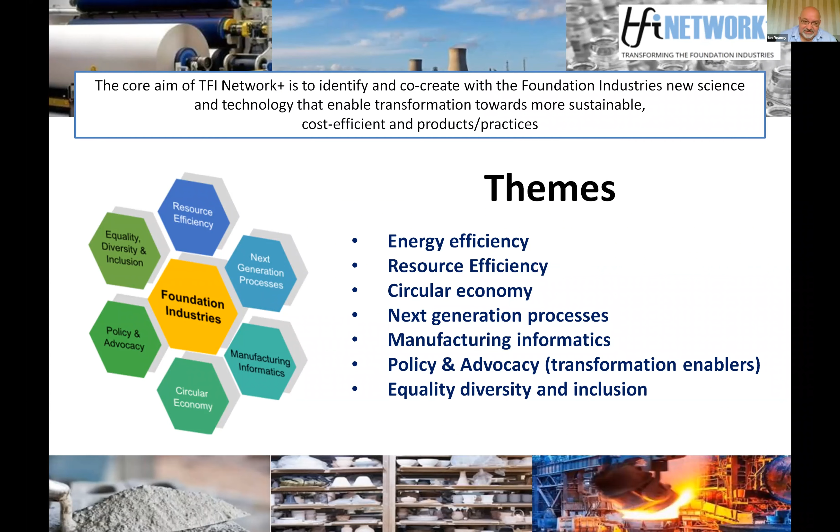And as we move forward, we have more events coming up. Our next project call is going to be resource recovery and industrial symbiosis, and there will be a workshop linked to that. We'll keep you all up to date through our outlets. Debbie will look after the advertising of events to make sure that you know all about what's coming up. And I hope you can attend future events as well as this one.

We have, in addition, our Blue Skies Green Future webinar series, which showcases groundbreaking technologies for the foundation industries. We've had 3 of those already. We'll restart that series in September through to the end of the year, where we have 4 headline speakers telling you all about exciting new potential things, which are not necessarily commercialized around the corner, but could be the future in the foundation industries. Sorry, can you go forward another one?

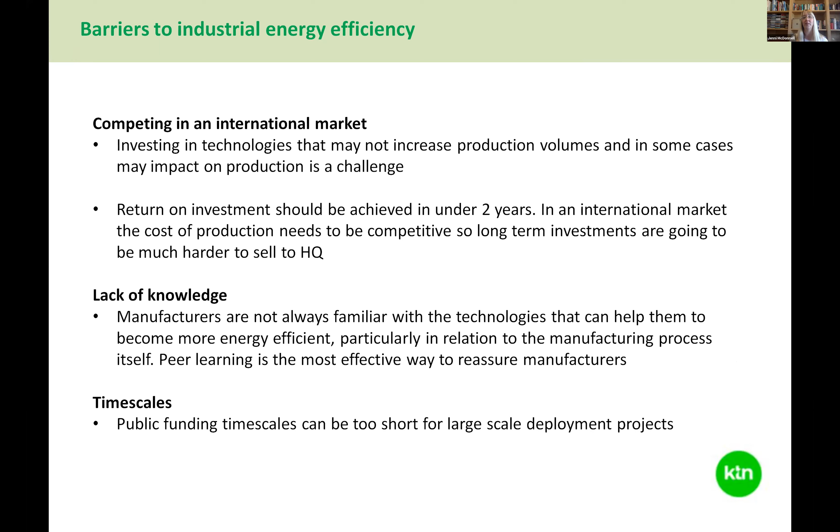Now, as I say, I do think from that gloom and doom, there is a light at the end of the tunnel. Over the last 18 months to 2 years particularly, I've heard a lot more manufacturers discussing their new net zero strategy and having a goal to get to net zero by 2035, 2040. And that is very encouraging. It does mean that they're now actively looking for solutions to help them become more energy efficient. And from the work that I've done with the government, I think these are probably the top 5 energy efficiency improvements that I have seen happening at manufacturing sites in the UK.

The first one, without a doubt, the most popular solution is heat recovery. Heat recovery on its own, or heat recovery with organic Rankine cycle or other ways of converting that heat into power that can be then reused in the manufacturing process. That is happening everywhere. The second one I would say is improved process controls and automation.

A lot of manufacturers will have a little bit of process control. Maybe the furnace has process controls, but not all the way along the manufacturing line. And that is something that they're now starting to look at. How can we join the whole manufacturing process together as a system and build in AI and automation to make the process more energy efficient?

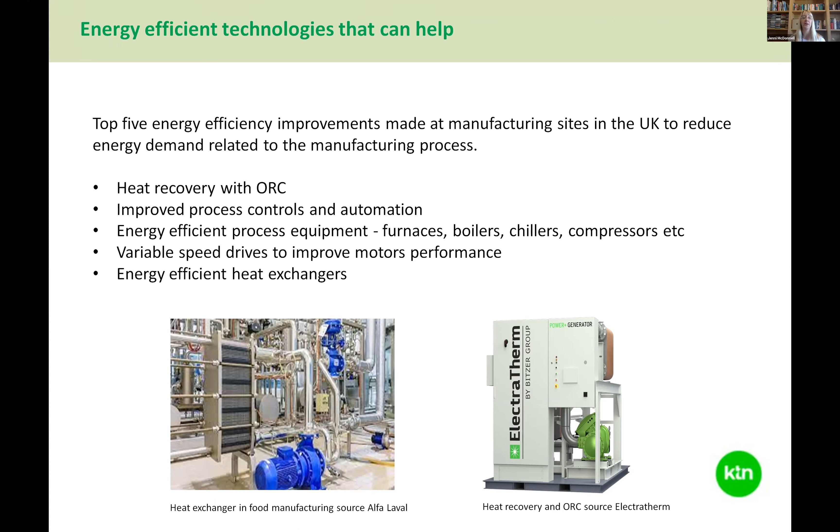So now to talk about one of the funding opportunities. Obviously, this is a TFI network, and I'm sure we will talk about the TFI competitions, which is R&D support for industrial energy efficiency. The Industrial Energy Transformation Fund is also supporting businesses with high energy use to cut their energy demand and reduce their carbon emissions. But this fund isn't R&D, it's capital investment for energy efficiency and decarbonisation. So it's allowing manufacturing sites in England, Wales and Northern Ireland to apply for the funding and install something that's going to make a difference straight away and allow them to achieve energy savings straight away.

The whole fund is 289 million. We had the first round of funding last year with 30 million spent, and we're currently in the spring window that's open right now, worth 40 million. Phase 2 will start in the autumn, and that's the remaining 219 million, and that will last up to 2024.

So there are 2 competitions open at the moment. As I say, in the spring window, you can either bid to do a feasibility or engineering study, preparing for future deployment projects, and that can either be in energy efficiency or decarbonisation, or you can bid into the deployment competition, which is deploying mature energy efficiency technologies. So that's technologies that are around TRL 8 to 9. Both those competitions are open at the moment. It does close on the 14th of July, so we've only got about 3 weeks left for this round of funding, but as I say, it'll be back in the autumn. Next slide.

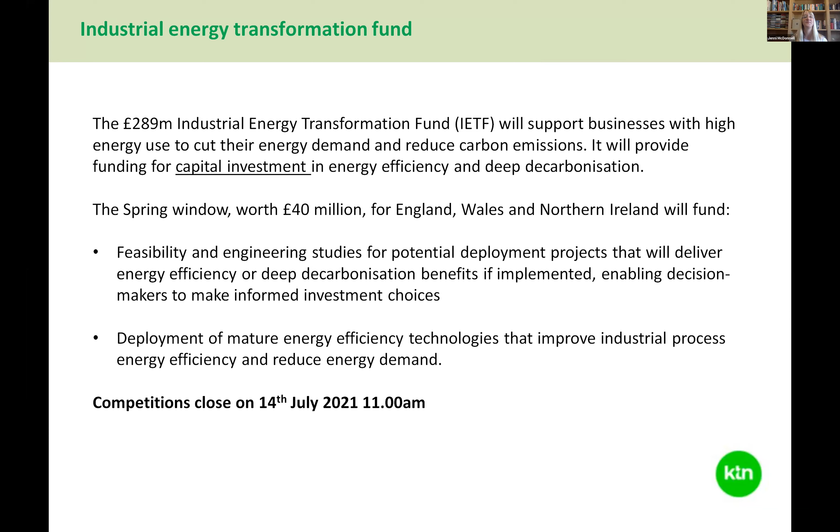So just to look at the 2 competitions in a little bit more detail, as I said, the feasibility and engineering studies is building that pipeline of future deployment projects around energy efficiency or decarbonisation. What it won't do, unfortunately, is fund sites to do energy modelling and understand their energy demand across their site, or do any kind of market analysis and review lots of different technologies before they choose what it is they want to deploy. You have to have done that piece of work already when you come to the IETF, and the feasibility study is then allowing you to check the technical and economic viability of deploying a particular technology on your site.

So these projects can be collaborative or single applicant, and it has to be led by the business that operates the manufacturing site. So if it's single applicant, it's the manufacturer, but they can have subcontractors and work with technology providers in that way.

The sites, so the studies have to be based on a site in England, Wales and Northern Ireland. If you have sites in Scotland, there is a Scottish government version of the IETF. The scope's almost identical, and their next round of funding opens in the autumn as well.

And the lead applicant for this one has to be the end beneficiary of whatever you're doing. So for instance, if you're doing a study to look at heat recovery, that energy saved has to be reused on the manufacturing process. It can't be given away to a local community or nearby business. But the good news is the manufacturer can partner with other businesses, research and technology organisations, academics and public sector organisations. As long as they have an active role in the project, then they can be a partner.

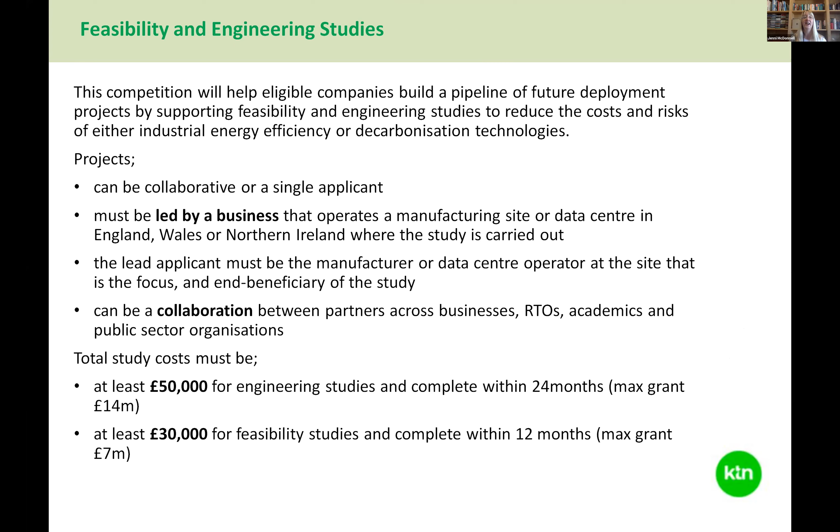Your total study costs, that's your grant plus match funding, have to be at least £50,000 for engineering studies and at least £30,000 for feasibility. Next slide.

And then the deployment competition, as I say, if you're ready to do something straight away, this is the one for you. You can deploy mature energy efficiency technologies that improve the efficiency of the manufacturing process itself. And this can be, again, collaborative or single applicant, must be led by the business that owns the manufacturing site where the technology is going to be deployed, and has to be the end beneficiary.

And as this isn't an R&D project, at the end of the project, the technology has to be fully installed and operating or ready to switch on. So you get those energy savings straight away as soon as the project is over. For this competition, the grant alone must be at least £100,000, and then your match funding goes on top of that. Next slide.

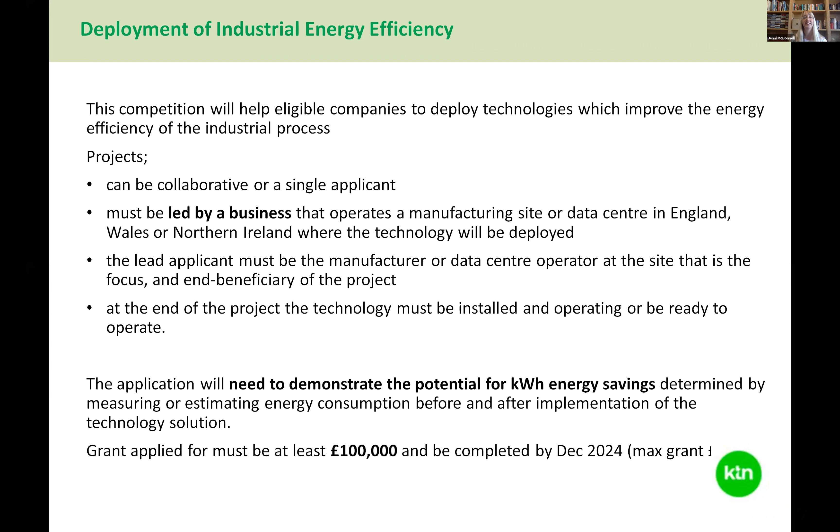So I just wanted to share 3 case studies. These were projects that were funded in the first round of the competition last summer. First of all, we have Hinton Perry and Davenhill. They're a ceramics company. They make the Dreadnought tiles and bricks. And they are currently looking at whether they can improve the energy efficiency of their brick and tile dryers by capturing the waste heat from their kiln flue gas, using hot oil to transfer that heat to the dryer, and then recirculating that heat to actually dry the tiles and bricks, instead of using gas and electricity,

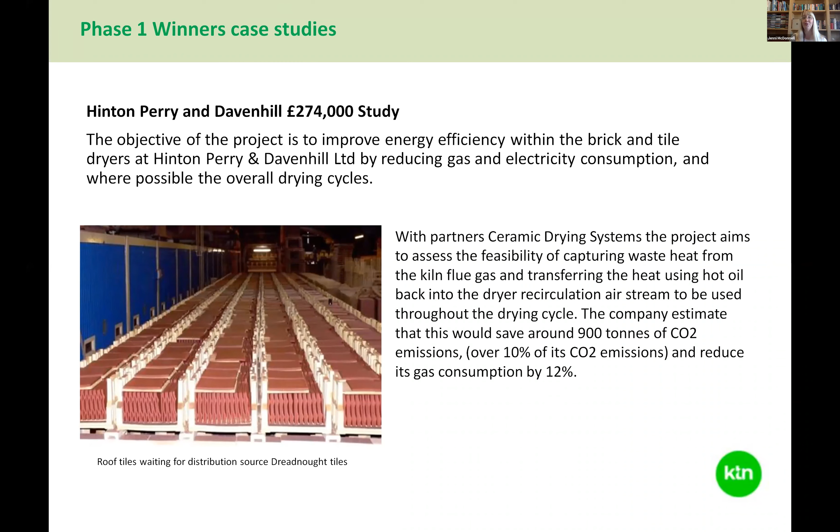which is how they do it now. The company has almost finished the study, and they reckon they're going to save about 900 tonnes of CO2 emissions, so about 10% of their current CO2 emissions by doing this. So that's going really well. I think they will continue to deployment. Next slide. The next one is Tate and Lyle Sugars.

They have a sugar refinery based in London. They're also doing a study and working with engineering consultants, Fichtner, and also a technology provider called PMW Technology, and they have developed a cryogenic carbon capture process called A3C. And so this study is looking at the feasibility of deploying this carbon capture technology at the refinery to capture the CO2 from the flue gas as a frost, and then using that recovered carbon dioxide as a revenue stream for Tate and Lyle. Next slide.

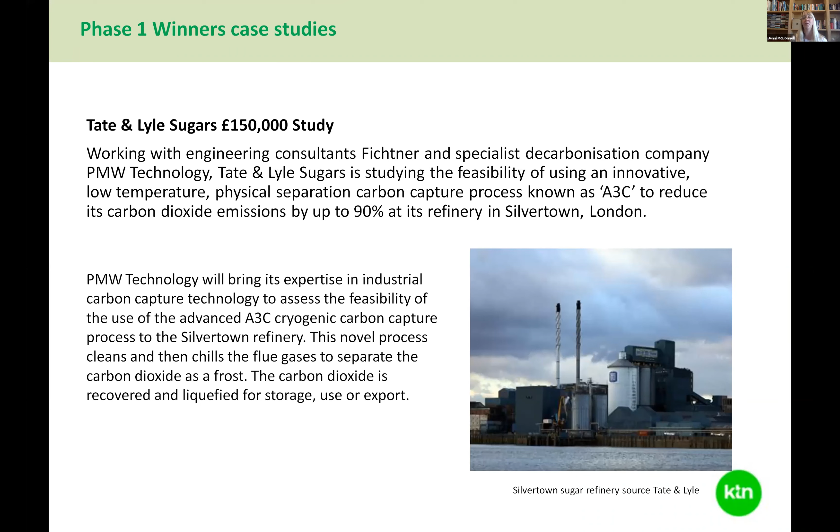And finally, one of the deployment projects, Essar Oil is a refinery up in the northwest, and they are deploying a brand new furnace for their process. They currently have an oil-fired furnace, and they are deploying a hydrogen-ready furnace. So it won't be burning hydrogen straight away, but the furnace that's going in will be capable of having 100% hydrogen to run it. It's also looking at other energy efficiency improvements such as heat recovery, and they hope to be the first oil refinery in the UK to run on 100% hydrogen.

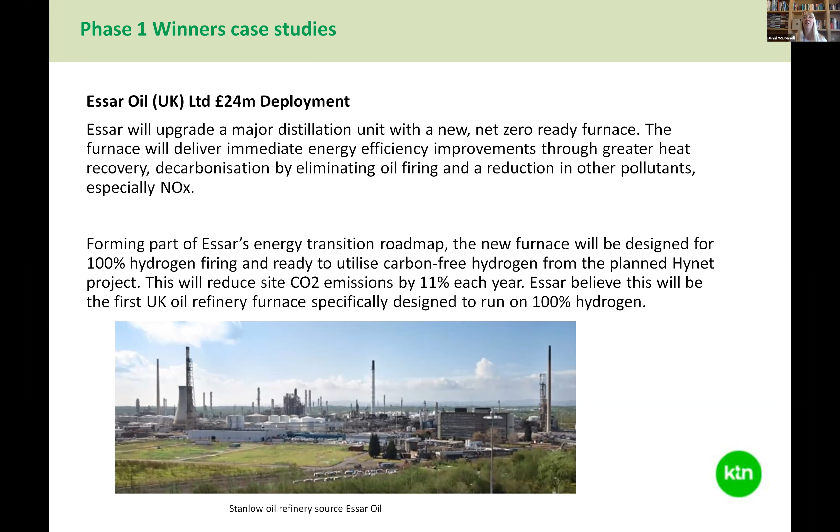And I think that's it. Yeah. So some great examples of what you can do around industrial energy efficiency. Thank you very much, Jenny. That was a fantastic overview of the funding landscape. And we can open up your talk to further questions.

I certainly have one, Jenny. Your funding is quite broad. Yes. And not specific to the foundation industries. No. Have you any idea of the percentage in your first call that went to the foundation industries? Not off the top of my head. It was a real mixture, though. Okay. You know, there wasn't one sector that dominated, and we had a good mix, and a good mix of sites across England, Wales, and Northern Ireland as well. So we were pleased with that.

Could you expand a little bit on the, you had some feasibility aspects to it and involvement of academics, perhaps. Could you expand on that a little bit to explain how that relationship might work in the context of some of these grants?

Well, probably more for the decarbonisation theme. For decarbonisation, because we know some of those technologies aren't near to market yet, the TRL level for that is TRL 7. The IETF won't fund demonstration or testing of a solution, but it will allow, I guess, academics to work with manufacturers to just explore whether something would work on their site, and then look elsewhere for funding to be able to demonstrate it. So I would think that's probably the best way to get involved.

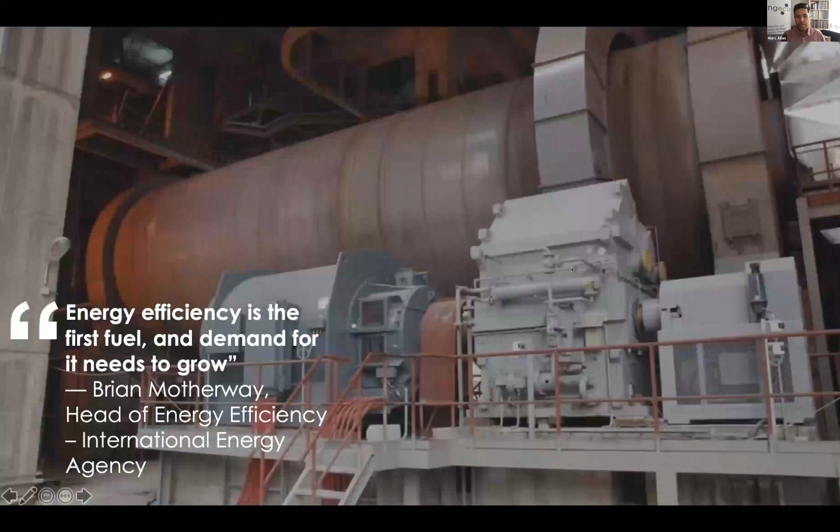So starting off with a quote from the International Energy Agency, and people have probably heard something very similar to this before, but it's that energy efficiency is the first fuel. So it's the first place that we should go to with regard to optimizing our energy consumption across the plant, and provides a great way to actually reduce emissions and reduce costs. So I'm going to look at 3 areas today in this fairly short presentation. We'll start off with some information around the context. Why do we even care about energy efficiency in crushing and grinding, or even energy efficiency as a whole? So this is taking a pretty broad view on decarbonisation and how that will play out. We'll look at the size of the prize.

So I just finished a piece of work on quantifying how much energy crushing and grinding uses globally for the mining industry. And there's a bit of an extension to that to quarrying and cement and other things like that. But highlighting how much energy in total does it take to turn big rocks into little rocks. And then looking at some of the opportunities, some of the things that we can do to try and reduce that energy use in these unit operations.

So looking first at the context. So it should be no surprise to anyone that decarbonisation efforts need to proceed, and they potentially need to proceed a lot faster than they are currently. There has been a lot of talk and announcements around net zero emissions targets being set by companies, being set by countries, all in support of these decarbonisation goals, and moving towards this state where we're at first net zero emissions and then ultimately negative emissions, so removing CO2 from the atmosphere.

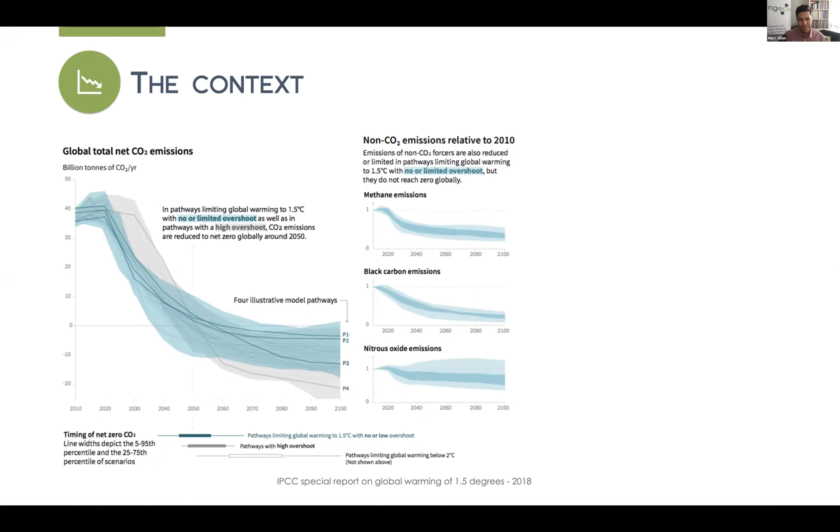If we're going to go for a bit of overshoot, we've got some time, but still not much. We're still decreasing at a pretty great rate of knots from 2030 in those. But the later we delay, the more time we take to peak and start coming down, the more we have to rely on removing emissions from the atmosphere, on negative emissions. So peaking is vital, and we need to do that straight away. Energy efficiency has a pretty big role to play in that. We are looking at needing a 7.5% reduction year on year in emissions.

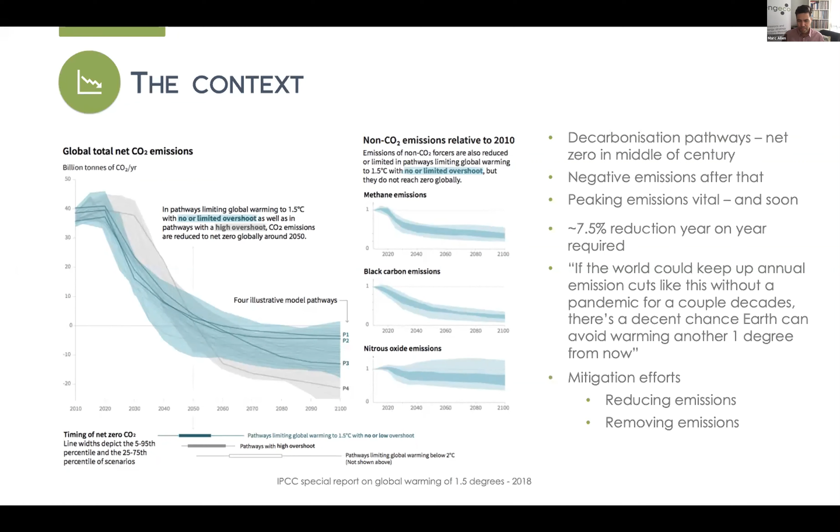Last year, 2020, was an unusual year, I think everyone will agree. Looking at 2020, which was untold economic and human damage, and a huge change in the way that we live and work and travel, etc., that only achieved about 7 to 8% reduction from the previous year. So we need a way to do that each year and keep that going way off into the future, and then ultimately start removing emissions. So mitigation efforts need to concentrate around how do we reduce emissions, then how do we remove emissions, and this is where energy efficiency has a pretty big role.

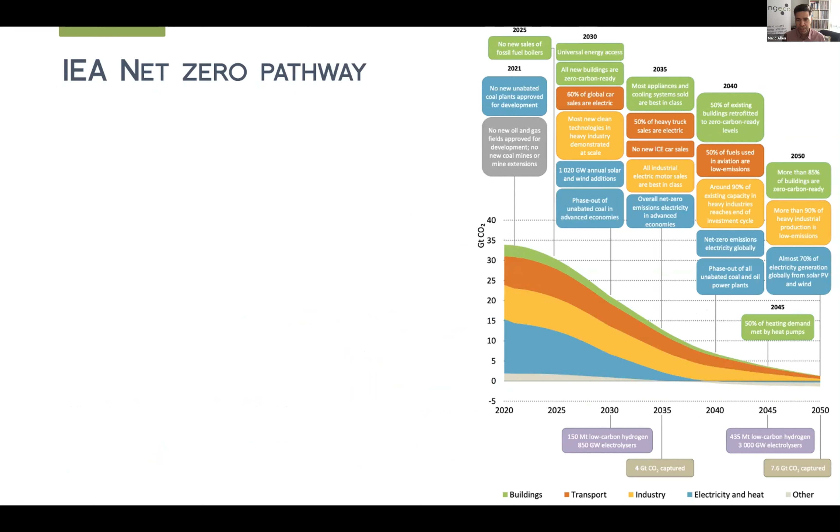The IEA also recently released their net zero pathway to achieve net zero emissions by 2050. A few headline numbers came out of that, particularly stuff around no new oil and gas developments, but industry features quite a lot in here as well in this scenario. So it's a pathway, it's a scenario, it's not a forecast, it's certainly not a view of things to come, it's a view of what's required. Industry itself has a pretty big role to play in these yellow boxes.

So looking at new technologies installed in heavy industry, and they'll, in the IEA scenario, be available at scale in 2030. Everything to be high efficiency motors, best in class motors, 2035. And then basically 2040, everything's at the end of its investment cycle. So any new stuff is going to be very new, very efficient equipment. So then hopefully by 2050, we've pretty much got rid of all of the emissions from heavy industry as well. This scenario tries to minimize the use of offsets, concentrates a lot on energy efficiency.

So it's really about, as well, to achieve zero emissions industry, how do we generate zero carbon energy? How do we then store that energy? Can we have high efficiency transmission or some sort of energy carrier like hydrogen or something similar to get that renewable energy to the place it's needed? But at the same time, we're also maximizing the efficiency of end users, so we don't have to generate so much energy in the first place.

So we are talking about a pretty big transformation to the energy system and to the end users to enable this net zero emissions industry. And to be fair, the more we can do without having to rely on offsets and carbon credits, which are useful in their own right, but certainly may not have the capacity to absorb all of our emissions.

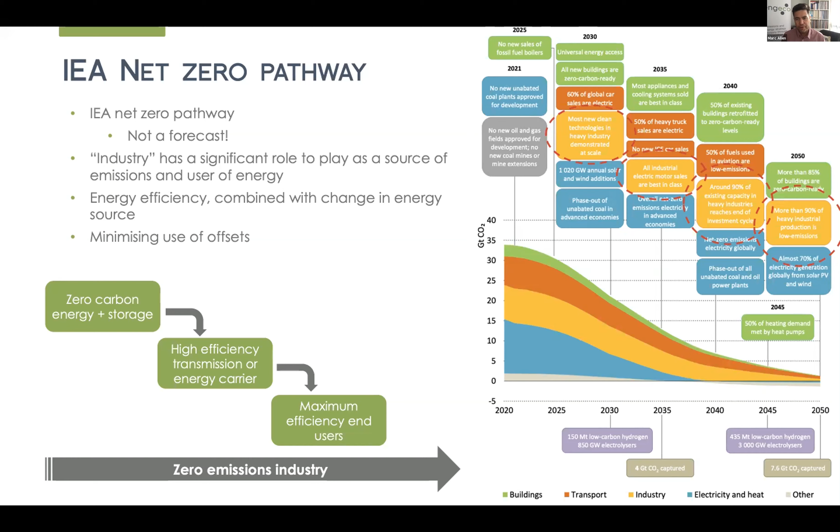So the more we can do to reduce that prior and minimize the use of offsets or save them for the really, really hard to decarbonize industries, then the better off we'll be overall. So looking at moving to the size of the prize.

So in particular, in crushing and grinding, how much energy does this single process actually use? So I recently completed a report quantifying this very thing. It was commissioned by Weir Minerals in Glasgow, and it looked at what is the energy consumption in the mining industry as a whole, and then how much of that is in comminution processes, how much of that is used to crush and grind rocks to get them to the right size for use in a mineral processing plant.

So comminution is a pretty big user of energy globally, right? It's a globally significant energy consumer for what is a single piece of equipment or one or two pieces of equipment in a comminution circuit, which does mean then it's a good target for energy efficiency. So small incremental improvements in this area can have a pretty big impact overall, and you can see a good emissions reduction as a result.

So the total final energy use that I calculated, and final energy is energy that's used at the point of use, so it's electrons or it's diesel in mobile equipment, total final energy use is 12 exajoules for the mining industry. About 3.5% of total global energy use goes into the mining industry, which is a pretty significant number. Of that, crushing and grinding is worth about 830 terawatt hours. So about 1% of total global energy use is used in comminution in the mining industry.

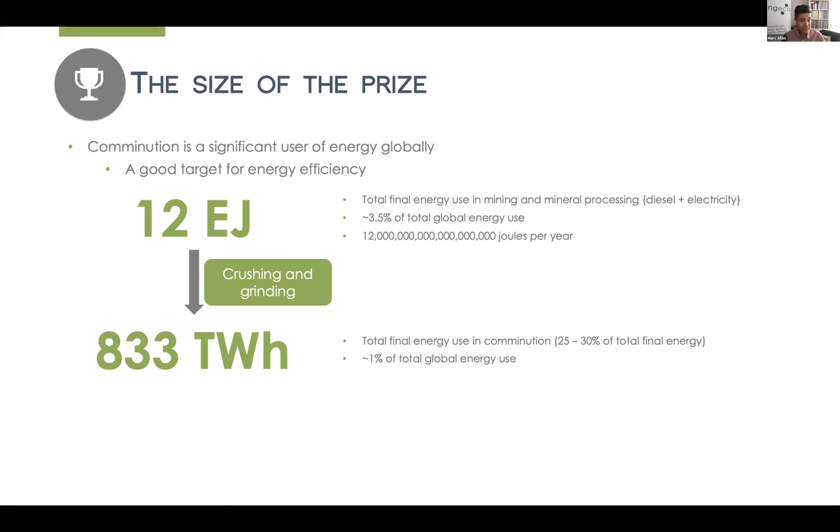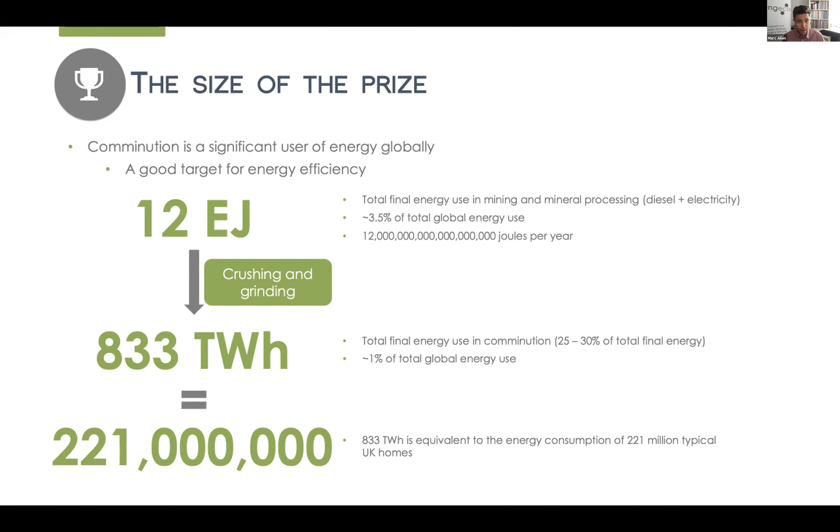When we include cement and quarrying and other processes that also use comminution, we end up around 1.5 to almost 2% of global energy use being used to turn big rocks into little rocks. And that's actually equivalent to 221 million typical UK homes, so about 3,700 kilowatt hours per year. So it's a significant chunk of energy that's going into this process, which is why it's something that we should look at.

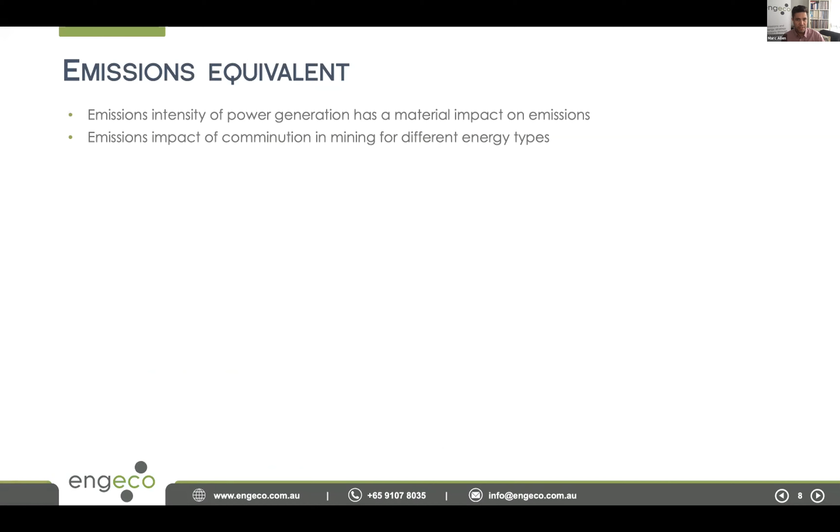When we turn that into emissions, because decarbonisation is the end game, we can see that the emissions intensity of the power generation, what power comes into your own facilities, has a huge impact on emissions, what's called scope 2 emissions. So if we look at the emissions impact in comminution for different energy types, just taking that 833 terawatt hours, if the company is self-generating, so if there's a diesel power station or a gas power station on site, which is pretty common in Australia and Canada and Africa and other mining countries, we're talking about 630 down to maybe 610 million tons of emissions to go into this process for reducing size.

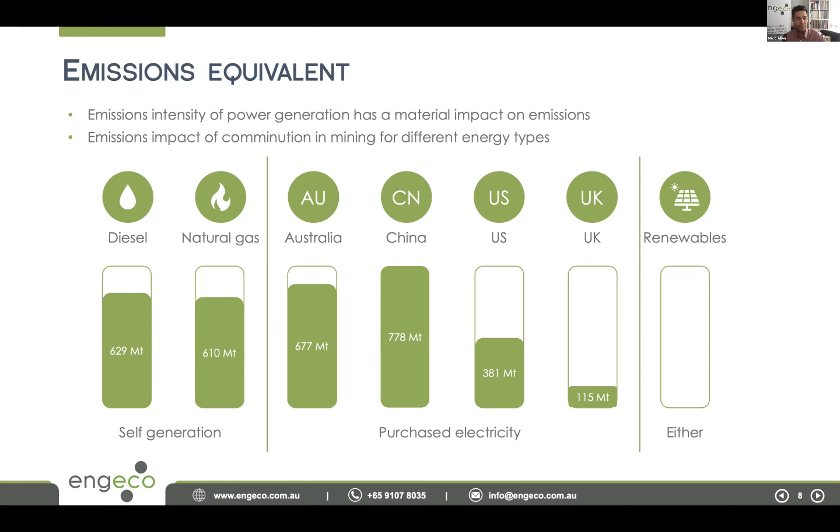If we're purchasing electricity, then that depends on the grid factor. So the UK has a very low emissions intensity grid, so 115 million tons for that. China has a very high emissions intensity grid because it has a lot of coal in the mix, 780 million tons. If, of course, we had renewables, either purchased or self-generated, then we would be zero emissions for that process. So a good outcome if you can get renewables, and if we can start addressing some of the intermittency issues around renewable energy production.

So moving into the opportunities themselves. What are the things that we have available to us, and what are the ways in which we can change the equipment or change how we're doing things to minimize energy consumption and minimize emissions? The ones that I'm about to mention are specific to mining. They come from the mining and mineral processing industry, but they might be able to be applied to some of the industries that you're in as well. So, potential to take some lessons learned from the mining industry and apply them to other applications, to cement or to ceramics manufacture or that sort of thing.

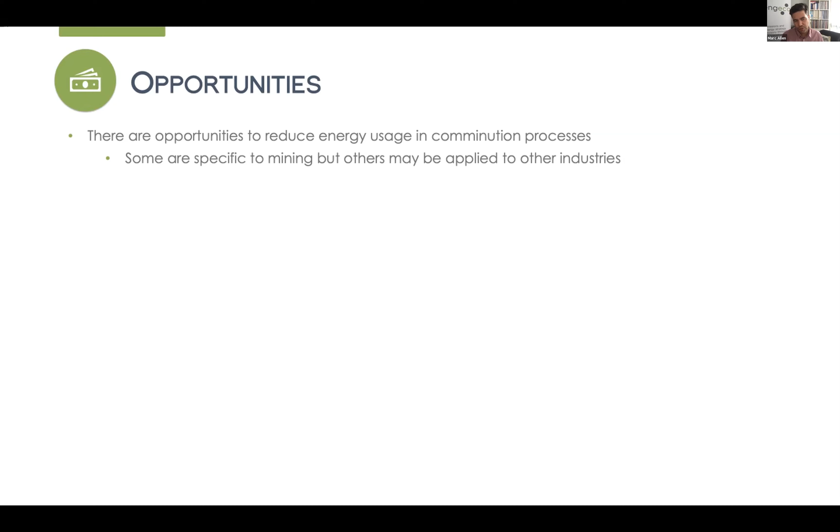So the first thing is around optimization. This can be applied to any industry, and there's a lot of work that can be done just by knowing what's going on within the grinding circuit and how the circuit is operating. So we can optimize the circuit to minimize what we call overgrind, where material is recirculating too much and grinding down to a size that we don't necessarily need. So we can do grinding surveys, do simulation, and ensure that the circuit is providing the optimum for the downstream, and that's what's key. The grinding area is really about providing a product that can be used in the rest of the plant.

In the mining context, it's about, can we get down to the right particle size so that the valuable material is liberated from the gangue material, the rest of the rock. So doing these surveys and doing simulation with dedicated simulation packages can be really, really useful to see where some of the energy waste might be coming in. And like I said, it might be in recirculated load, or it might be in the way cyclones are set, or it might be in the pulp density in a wet process as well.

This is one of the lower capex opportunities. Typically, you'll uncover a few things from this sort of optimization and simulation process, and a lot of them will have pretty reasonable payback, and many times it's just about tweaking operational settings.

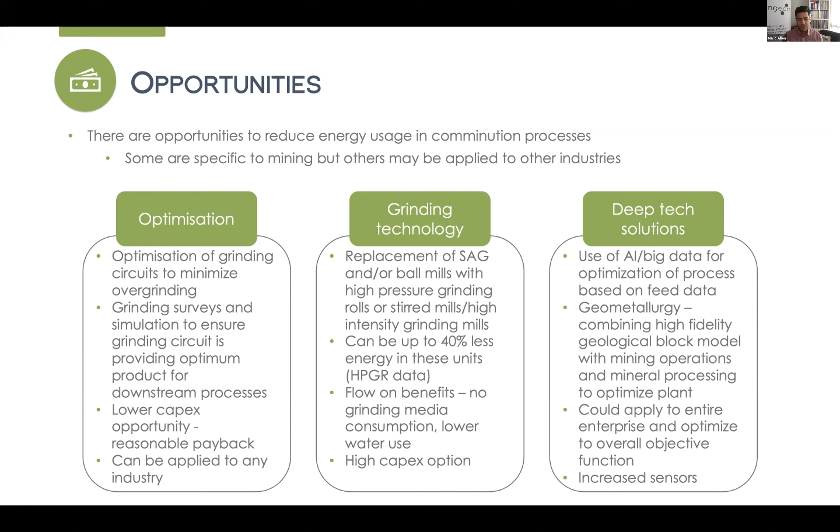A lot of the deep tech solutions do require increased use of sensors throughout the plant. And a general comment that sensor technology is getting a lot cheaper to deploy, and wireless technology is getting good enough to use in places like mine sites or in processing plants, etc. So you can actually increase the data flow and then use some of these tools to actually use that data. I've been to too many operations where there's a lot of data collected but not used, and that's a pretty common state of affairs. So having these computer-based solutions now to utilize that data and get information out instead of just raw data.

And the final opportunity really is around challenging the whole paradigm. How do we operate these plants? So renewable energy is a great way to reduce emissions, and it's cost effective and is the cheapest cost of power today for a new build, and it's increasingly becoming the cheapest power for existing operations as well. But intermittency is something that needs to be solved. So in an off-grid operation, we need to overbuild the renewables, install storage. For on-grid, we'll be using corporate power purchase agreements, but then you're subject to future costs. So there's a business case to be done there.

But the question really is, is there an opportunity to challenge the paradigm, which is just to operate 24/7? Is there a way to operate the big energy users, the grinding operations, to maybe take advantage of peak power supply?

Is there a way to overbuild the grinding circuit, for example, have surge capacity built in, and then turn the grinding circuit off or move to batch operations? So these are some of the things that we should be thinking about as we move the grid to hopefully a really high renewables penetration grid.

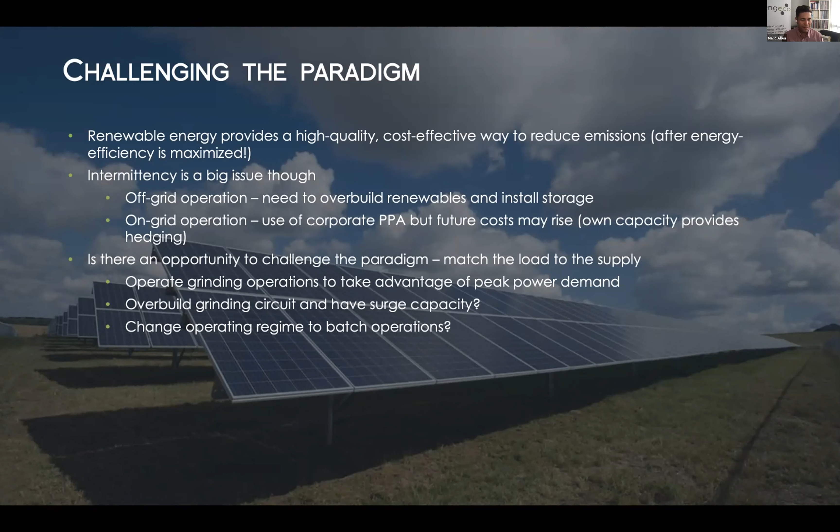So yeah, just in conclusion, comminution is currently a significant energy user for a number of industries. It will probably remain that way for some time. It takes a lot of energy to move these machines around, but these small improvements actually can have a big contribution to overall decarbonisation. So it may pay to look towards the mining industry and see what they've done or what they're doing in terms of maximising their efficiency, and see what can be ported over to other industries.

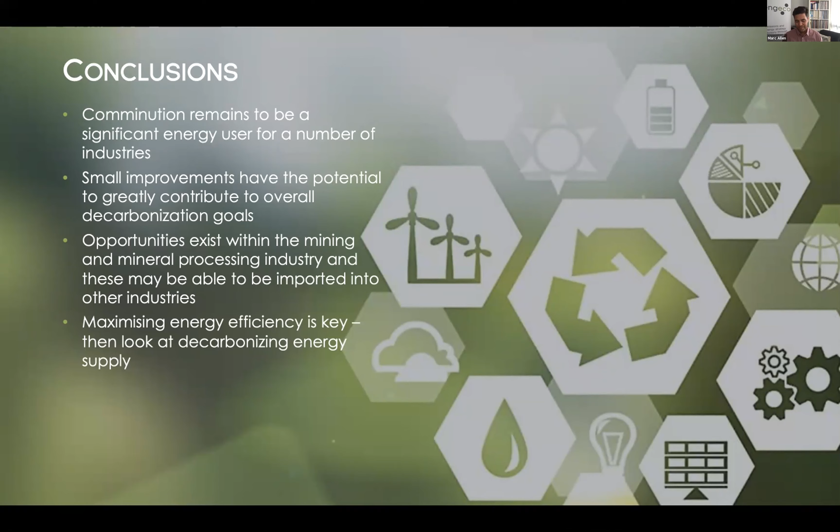Thank you, Mark. That was a superb overview of the challenges and some potential solutions, which is the comforting side of all of this, is that there are some potential solutions. We are obviously a little bit behind on time, so if there's just any questions for Mark at this stage.

Okay, so we have a poll which is now ongoing. If you want to vote for this: comminution is inherent in raw material manufacture for many foundation industries. Should this be included within the scope of the roadmap for your company sector? If you could have a look at that and click on the poll function, then we can have a look whether you think this is an important thing or not. I have my opinions, but I shan't influence you. Okay, so that poll is ongoing.

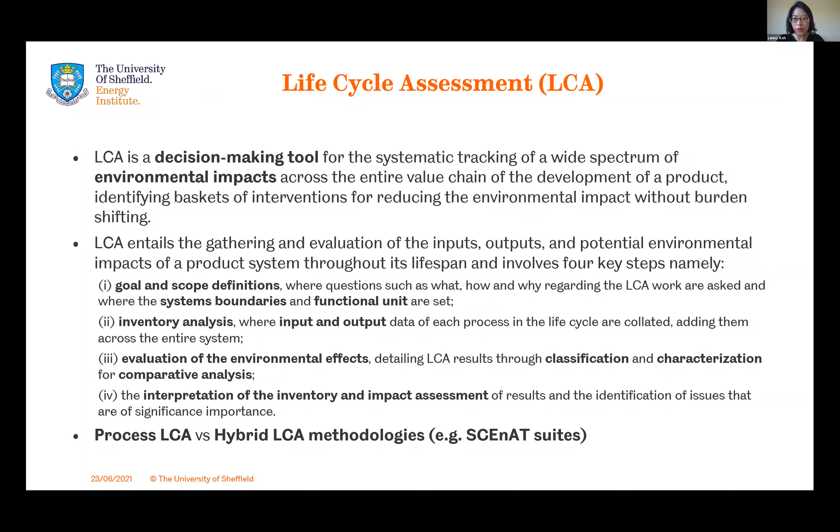There are various software tools available commercially and also in the research environment to do LCA studies and to map supply chains. My group has developed such a software tool, called SCEnAT, Supply Chain Environmental Analysis Tool, in partnership with Microsoft. But there are also other commercially available tools such as GaBi and SimaPro, and also open source LCA tools such as OpenLCA, which are widely available for use and deployment.

Techno-economic analysis is very important as well, because while with LCA we can quantify the environmental impact, when we carry out techno-economic assessment we are able to analyze the economic performance of the system. Therefore, we can combine the consideration of economics and costing as well as the environmental impact of a given system. Because we need to balance the techno-economic performance as well as the environmental performance of any given material, product or supply chain. Therefore, I think both of these methods are equally important in any decision-making process.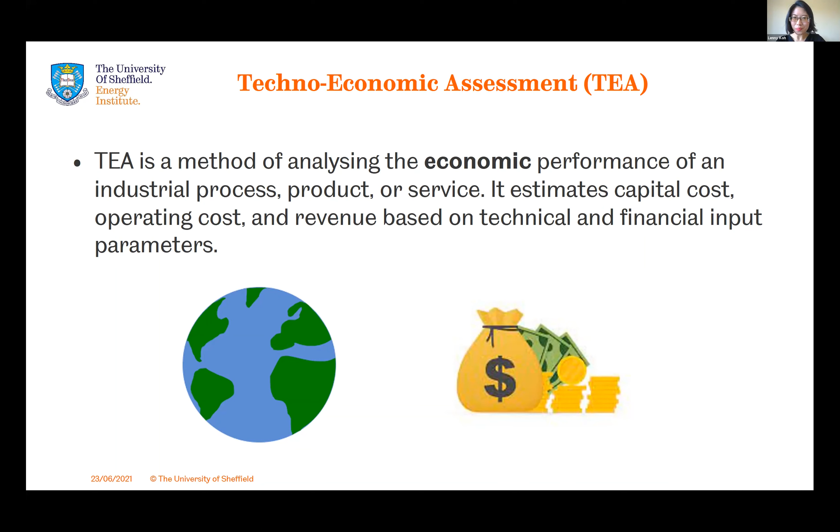So in one of the papers that we published in 2017 in Energy and Environmental Science, we presented a generic framework that combines LCA and TEA together. As you can see from this slide, it captures the specific inputs in the framework for TEA, techno-economic analysis, and the specific inputs required for LCA in order to conduct the analysis.

So for TEA, generally speaking, we capture input from purchase costs, installation costs, finance, engineering, and construction costs, which are classified as part of the CapEx calculation. And then for the OpEx calculation, we capture raw material costs, energy costs, labor costs. For the LCA, emission inventories are necessary in order to do the calculation.

So we capture data such as upstream supply chain data of a given product, logistics, and the conversion process, which will capture the energy intensity data. In both of these situations, we need a detailed understanding of the fabrication or manufacturing processes of those materials in the supply chain. So therefore, materials processing and fabrication is applicable for both of these methodologies.

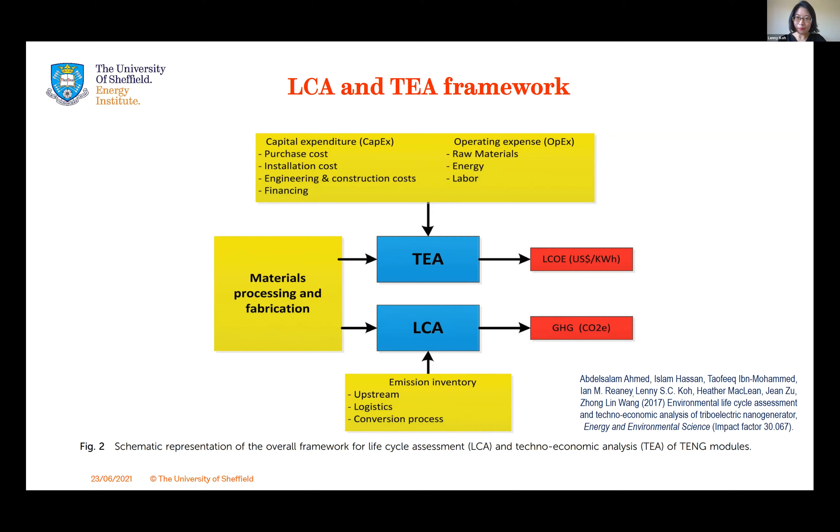So the first example is triboelectric nanogenerator, TENGs in short, manufacturing. Applying the generic TEA and LCA framework, we look at the techno-economic and environmental impact of TENGs in this particular paper. This study is a collaboration between Ian's group and my group, and also with the group at Georgia Tech.

So put simply, we compare the techno-economic performance and environmental sustainability performance of two different modules, which have two different material compositions, module A and module B. Module A has a higher efficiency performance, and module B has a lower energy efficiency performance. But you can see here, in terms of their manufacturing or fabrication steps, they are very similar.

Broadly speaking, it includes preparation of the substrate or the mask, dielectric layer deposition in a roll-to-roll process, microstructure patterning or surface treatment, electrode and wire welding, adhesion, machining, and device assembly.

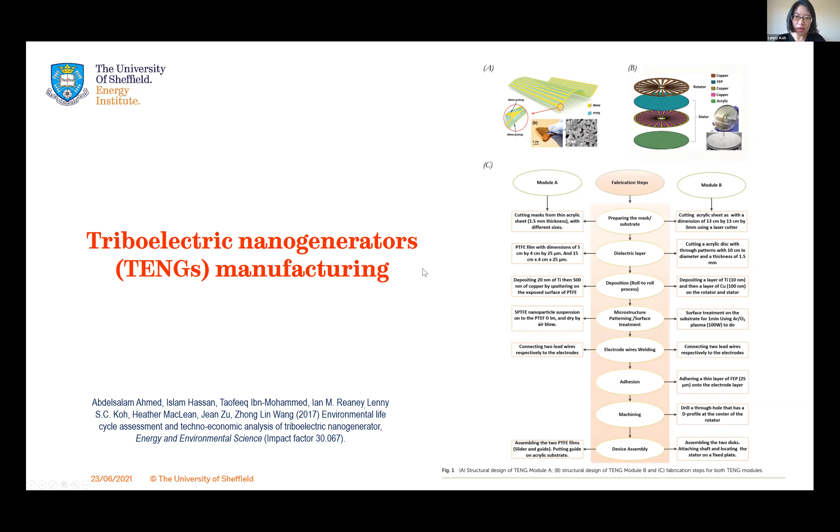So we look at the processes involved in the manufacturing of both modules in this particular study. Then we define the system boundary in the LCA. So system boundary means, in this particular case, it's a process-based LCA. So we look at the direct impact.

Therefore, identifying the energy input, the natural resources input, the raw material extraction, meaning the acrylic sheet, the PET film, lead wires, FEP thin layer, copper, titanium, and gold specifically as an input, and also the fabrication process. So in this particular case, batch weighing, cutting stage, deposition stage, microstructure patterning stage, adhesion, machining, and sealing.

And then run the LCA, which will then provide the specific result for the specific environmental indicators that we have selected. So in this case, we have looked at climate change, material use, carcinogen, ozone layer, radiation, and so on and so forth, as you can see from the slide. And in LCA, we can quantify the midpoint impact assessment, which are those that I mentioned just now. We can also identify and quantify the endpoint assessment, which are classified into human health, ecosystem impact, and resources impact.

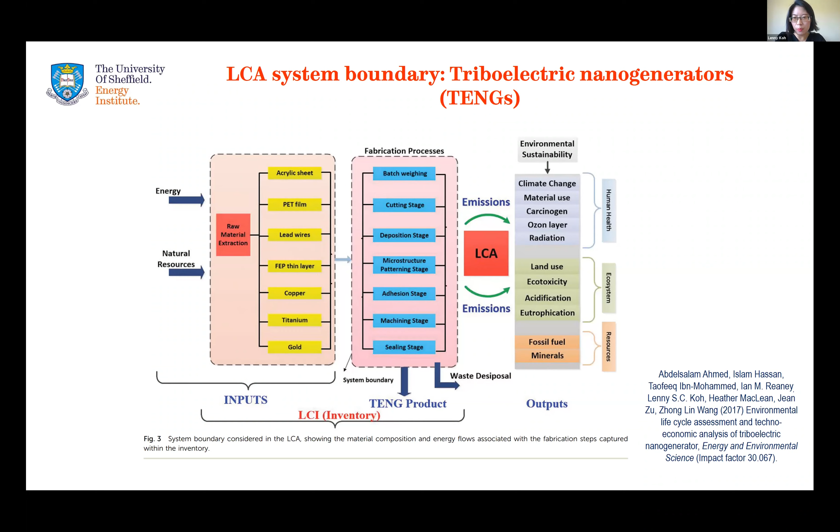So this is why defining the system boundary in an LCA study is very important. So we know exactly where the impacts are in a particular product or in a particular system or supply chain. In terms of TEA, defining the cost parameters is very important. So getting the data for material costs, for overhead costs, and for capital costs is very important.

Now, for a new material that doesn't exist, this will include identification of this data from databases, from literature, from previous studies, and from the laboratory. But for materials and products that already exist, that will need input from industry partners. So by using this data, we will then be able to compute the levelized cost in USD per kilowatt hour for this particular study.

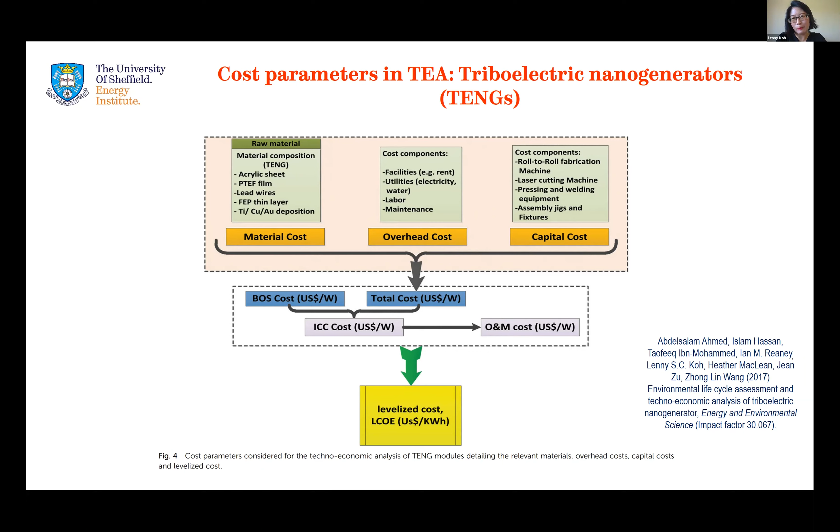One of the key purposes of doing LCA and TEA is to be able to make comparisons. So we know, based on the comparison and the result, whether a particular technology or particular material or product is better than the others. So comparison of TENG A and B modules in this particular case, also with other materials.

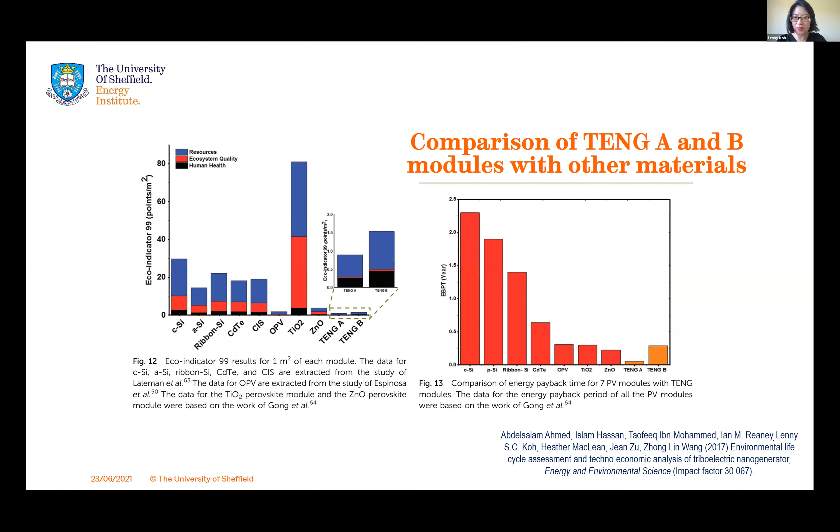So as you can see here on the left, we compare TENG A and TENG B materials in terms of the eco indicator, summarized into resources, ecosystem quality, and human health, against the other materials. And TENG A in particular has the shortest energy payback period as compared to all of the others, including TENG B.

For example two, we look at the environmental impact, but in this particular case, we look at hybrid LCA between KNN and PZT manufacturing. So that is lead-based, lead zirconate titanate, versus lead-free material, potassium sodium niobate, piezoelectric ceramics.

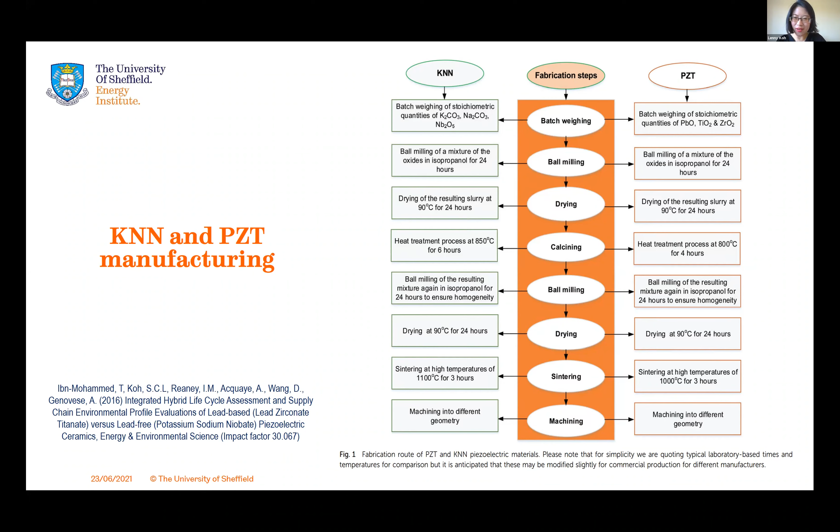For KNN and PZT manufacturing, the fabrication steps include batch weighing, ball milling, drying, calcining, ball milling, drying again, sintering, and machining. All of the temperature inputs and the stoichiometric quantities of each of the material compositions are captured in this particular chart. As you can see here, the temperatures needed in order to process some of these manufacturing cycles are extremely high.

So in terms of thermal energy, KNN consumes much more thermal energy than PZT for the drying, calcination, and sintering processes. And for electrical energy consumption, we can see that ball milling is the most energy intensive. But if we look at the comparison between PZT and KNN, there is not much of a big difference there.

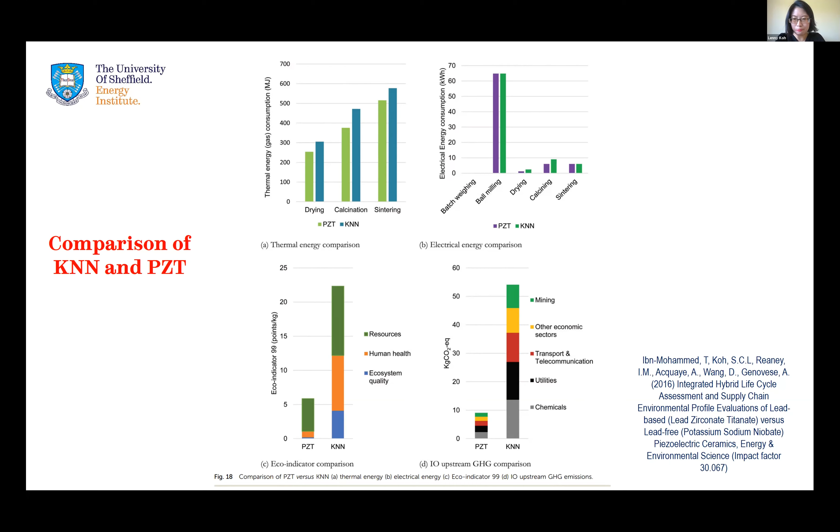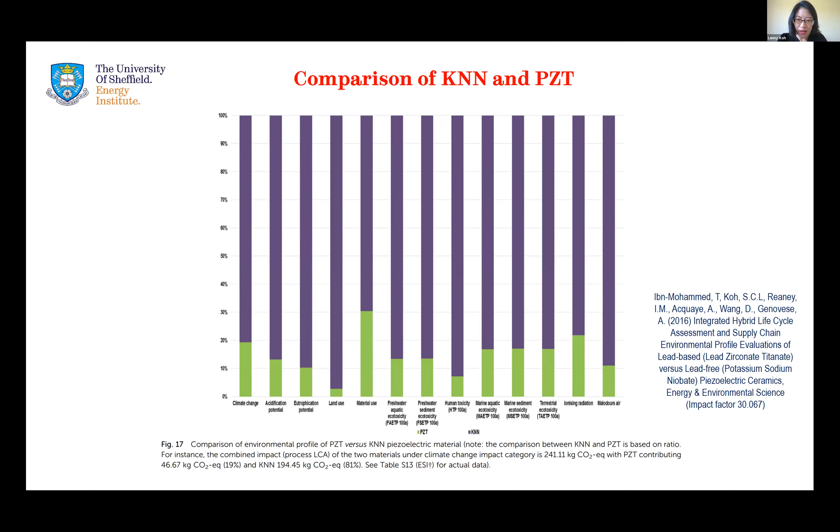So looking at this a little bit deeper, the environmental profile between KNN and PZT can be summarized in this chart, where across these 13 different types of environmental indicators, we can see that PZT has lower environmental impact as compared to KNN. And if we look specifically at what actually caused high environmental impact in KNN, the main problem or the main source is actually niobium. So the pink sections of this chart. And this is consistent broadly across all of the 13 different indicators, ranging from climate change impact, acidification, eutrophication, to malodorous air impact.

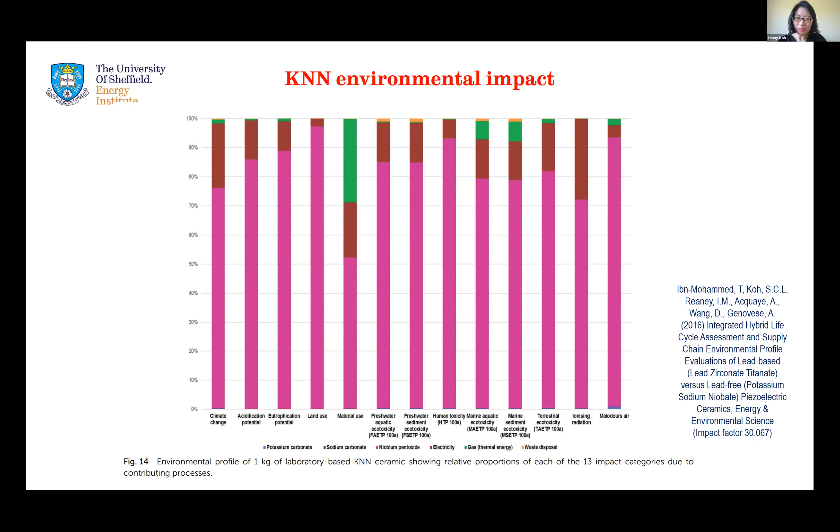So what are the key messages? The key messages really are that generic TEA and LCA framework and methodology are useful and applicable for any material, technology, product, supply chain, and system. So regardless of any product or materials or supply chain, this is very useful in order to quantify economic and environmental sustainability impact of a product or a system. And they are measurable, so it's not qualitative or just based on opinion. This quantification is really very important, especially when we are moving ahead to understand and contribute to net zero accountability for both industry and all of the important stakeholders across our system.

So I think this is going to be an important requirement as well going forward in some of the bigger contract-based studies, which will require understanding of scope 1, scope 2, and scope 3 emissions in their work. Therefore, the role of TEA and LCA will become even more important in that particular situation.

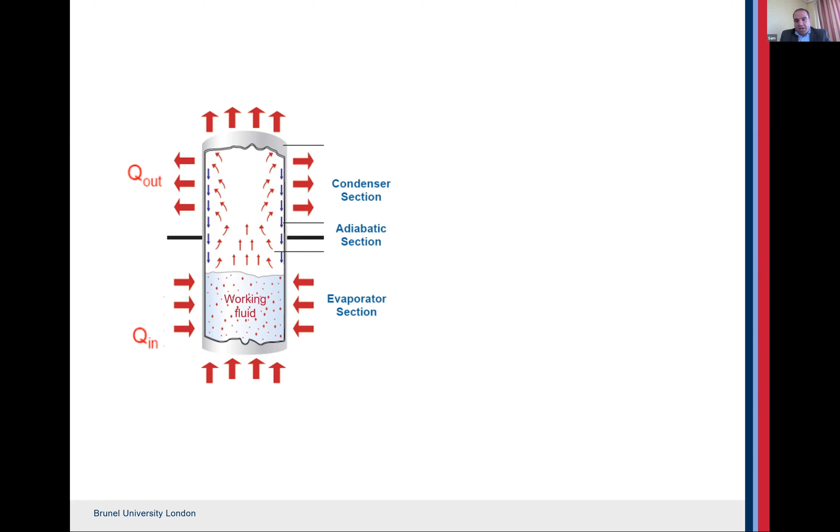The heat pipe is a hermetically sealed structure. In this case, it's a tube filled with a small amount of working fluid, surrounded by a preconditioned surface. During operation, the pipe absorbs the heat, and this heat is used to evaporate the working fluid, and this vapor then transfers to where the cold surface is to condense and give out the latent heat. So in this way, we are boiling, condensing, and continuing the cycle. And as you know, latent heat is a very effective way of transferring heat because of the HFG value.

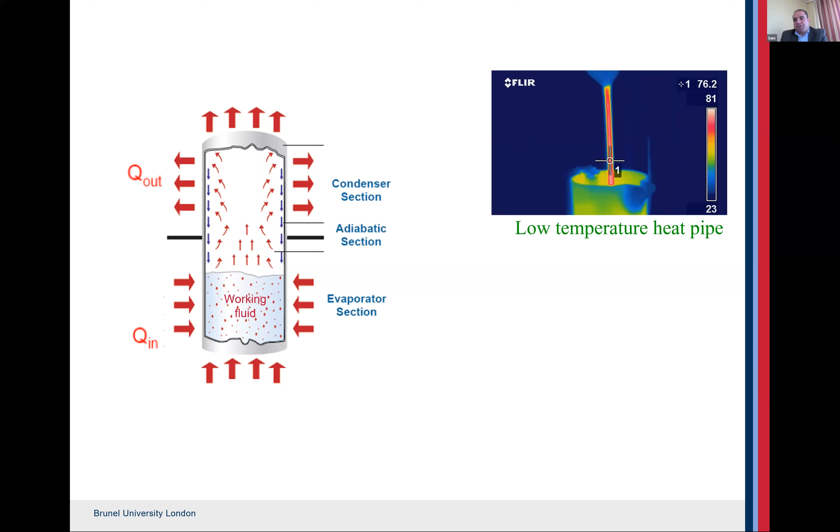You can see my hand here holding a heat pipe in a kettle. One thing you will notice is a uniform temperature from the kettle to my hand, which is a characteristic of the heat pipe that I will talk about later. Based on the working conditions, heat pipes can be used for applications all the way from molten metal, in this case you can see a sodium heat pipe, down to very, very low temperatures. We went down in the lab to -100. Depending on the temperature requirement, the combination of the working fluid and the shell material will be selected.

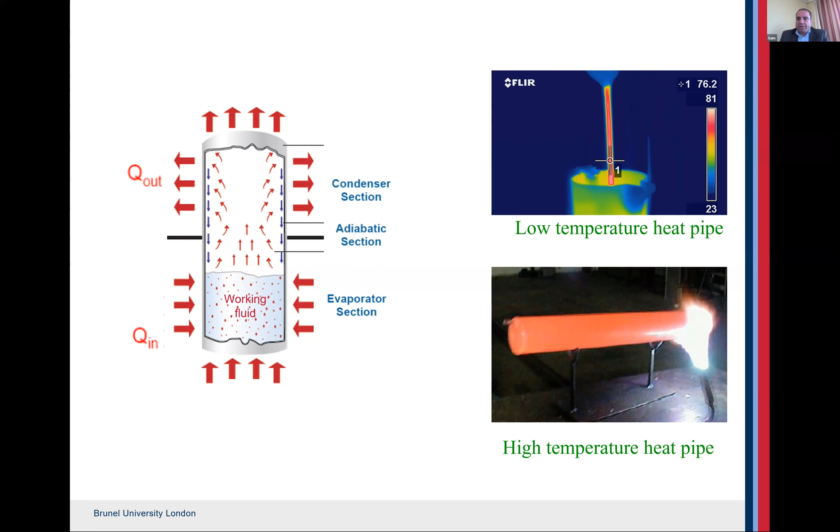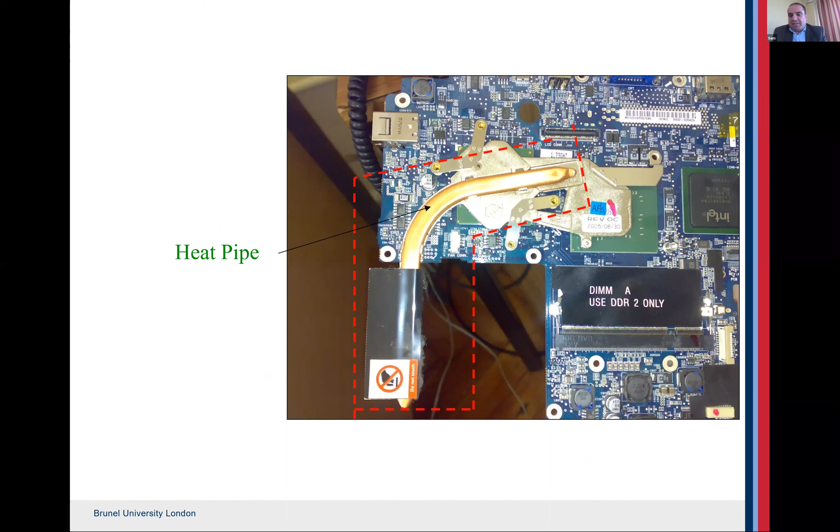Each one of us will have at least one of these heat pipes. You can see one here inside the Dell Latitude laptop. Because of this heat pipe, we managed to make laptops so thin, so we don't have to put the heatsink directly on top. The heat pipe here is taking the heat from the CPU to where space is available to get rid of the excess heat to ensure the laptop works in a nice way.

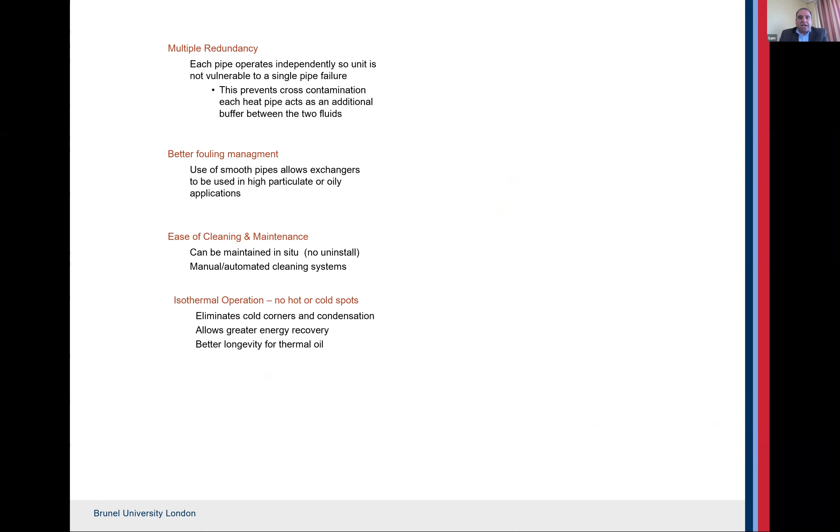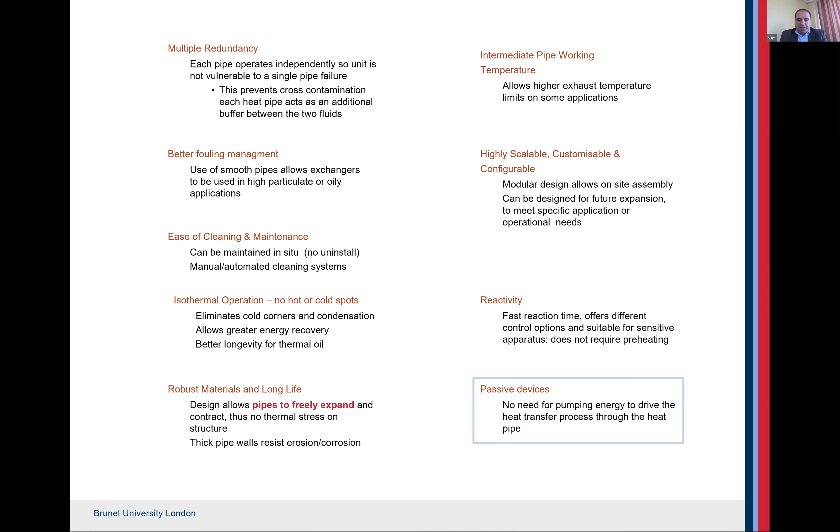There are so many characteristics about the heat pipe that I can talk about, but I'll leave those to you to check later. Mainly, basically uniform temperature in each section and ease of cleaning, maintenance, reactivity, etc. The most significant of which is the passive operation of these heat pipes. You don't have to run a fluid through them. They will actually absorb the heat from the heat source and deliver it to the heat sink. The only limitation you have is what sort of heat transfer coefficients you have on both ends and how high they are to facilitate the transfer of the heat at the required speed.

Some might say, well, why don't we just use existing technologies? Well, existing technologies, or what we call conventional heat exchangers, in some challenging scenarios, they don't actually deliver because maybe the streams or the heat source have high temperature and exhaust flows, very high mass flow rates that bring in kinetic energy issues that might destabilize the system. When you have, for example, the ceramic industry or the glass industry, you have high particulates in your flow, and these tend to settle inside the heat exchanger, clogging it in the long run. In certain scenarios, I've seen one system clogged in 1 week because basically all the particulates settled inside the system and clogged it. And also it depends on the fuel you use.

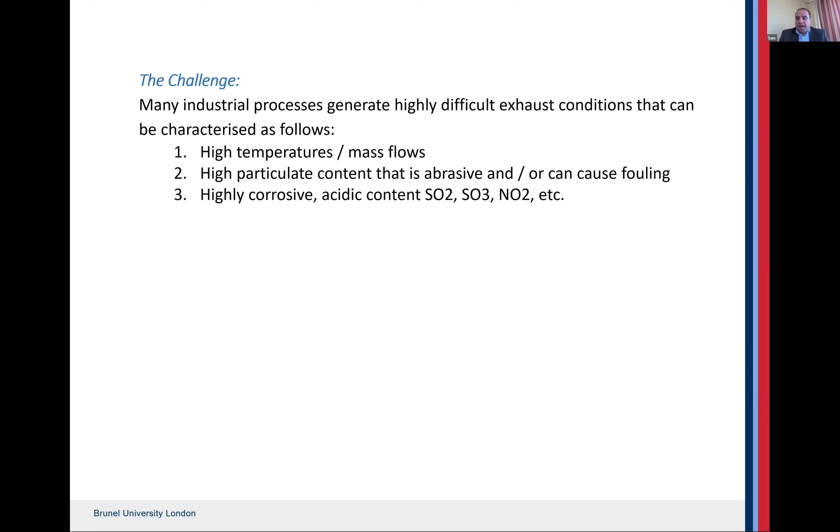If you're using fuel with sulfur in it, you end up with SO2, which transforms to SO3, and then later on combining with water, the sulfuric acid. And these can be an issue, especially if you have cold spots that will lead to corrosion issues because the acids condense inside the metal. So heat pipes actually do address many of these concerns. For example, inside the hot region, the heat pipe will operate at the uniform temperature in that section, which means there is no risk of having cold spots that will lead to condensing acids and then later to corrosion. So this is a very important characteristic of this technology.

And also, because in a heat pipe heat exchanger, it is really a number of heat exchangers linked in parallel. Each heat pipe is a heat exchanger. If half of them, say, go out of operation, the rest will continue to transfer the heat, which means you don't have to stop your process. You can stop your process later on during your normal maintenance cycle and then basically fix the issue and see what caused it. So multiple redundancy is something very important, and this technology actually can provide it.

And payback came up earlier. Whatever we do, whatever we design, the majority of the industries will not accept anything with an ROI higher than 24 months unless there is an incentive. So most of the systems you will see later today in this presentation have a payback of 24 months or below.

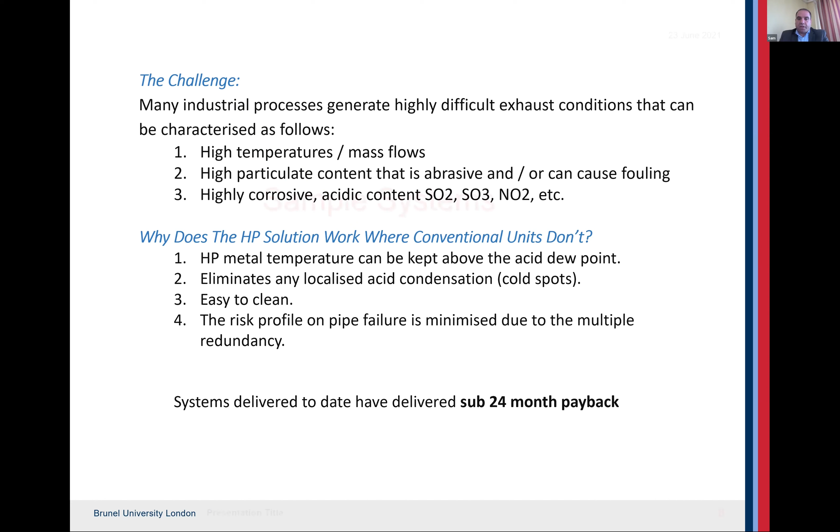Sample systems. So here's a system, basically a gas air preheater sitting at the back of a furnace. And you can see the box here, that's a heat pipe heat exchanger sitting there, transferring the heat from an exhaust gas to preheat it before the combustion chamber. If you take it out, you can just see it's a simple bundle of tubes staggered in a certain configuration based on the thermal design. It looks simple, and from a design point of view, it's not that simple, but you can see basically the multiple redundancy that I mentioned before, because each one of these heat pipes is a heat exchanger, and all these heat pipes are linked together in parallel thermally.

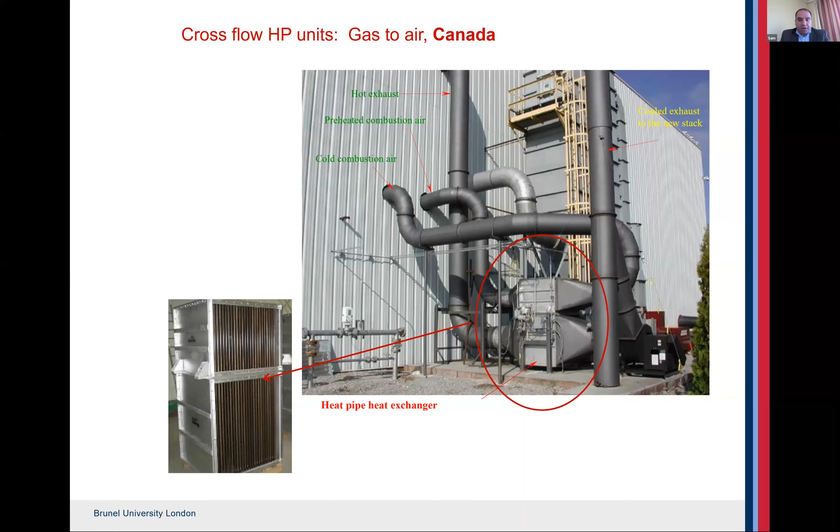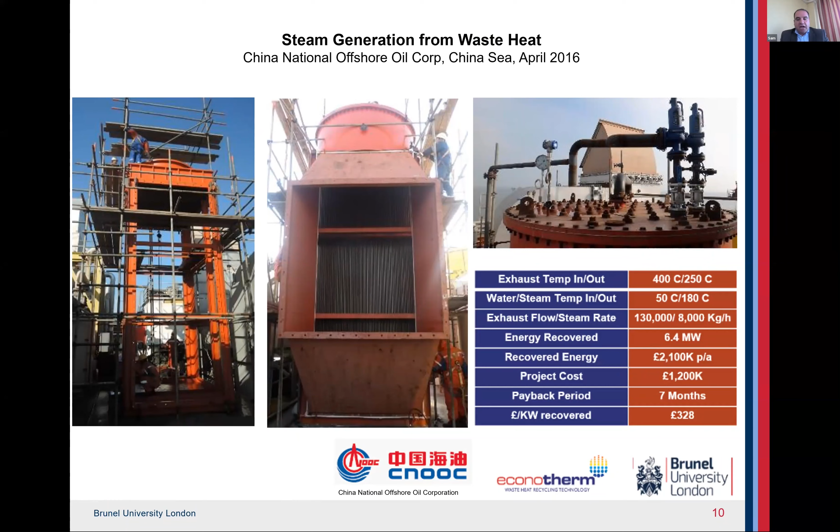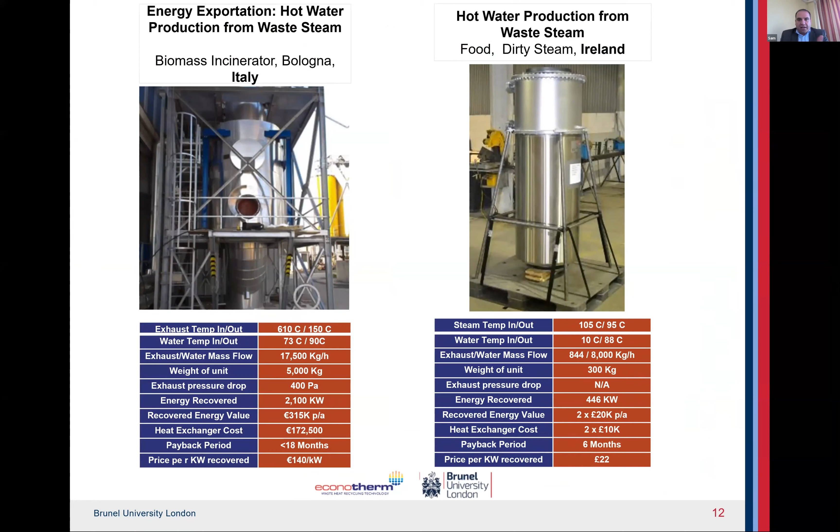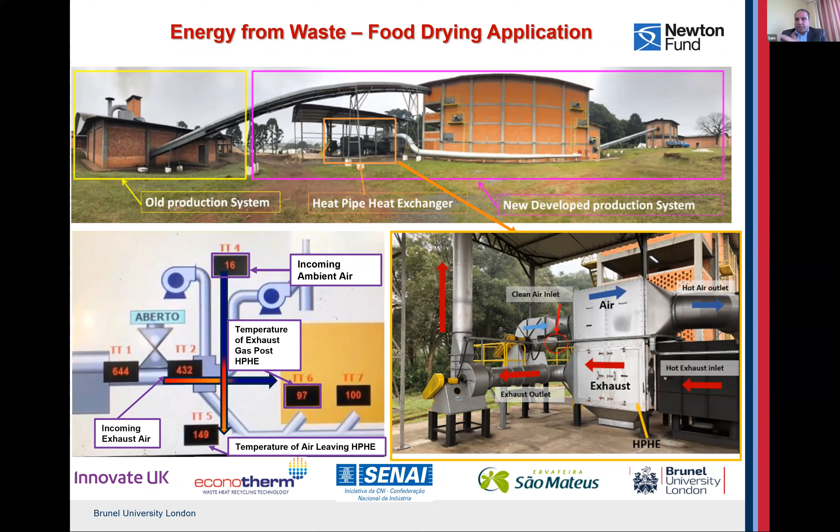Another example that was funded by the Newton Fund in Brazil, where we actually used the heat pipe system here to absorb heat from burning waste. And this heat, which came from a dirty source, was then used to heat clean air. And this clean air was later used to dry tea leaves. And the project was delivered successfully a couple of years ago, but it's a good example of using this technology in this area. We're refocusing now with regards to the ceramic industry. We started activities in this sector in 2015, where we looked at the process itself.

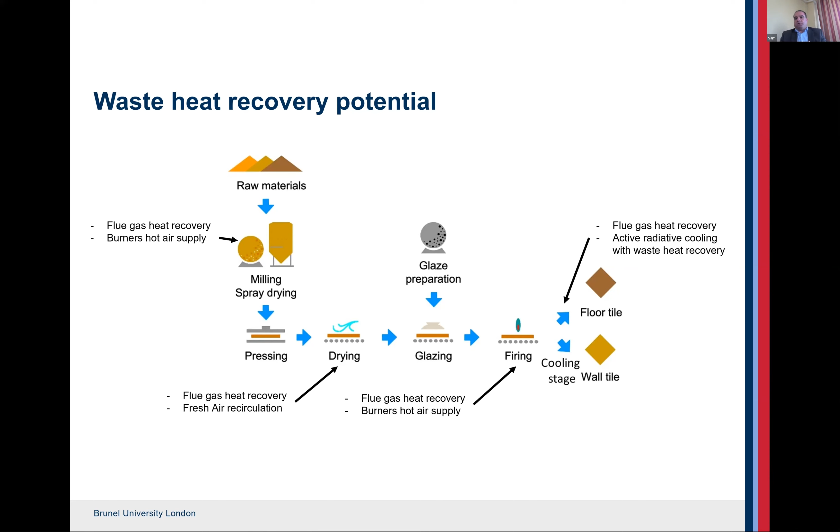It has been covered earlier today. I'm not going to bore you with the process, but we did an energy audit to see where the potentials for waste heat recovery in the process are. And we identified a few that we can deliver solutions for.

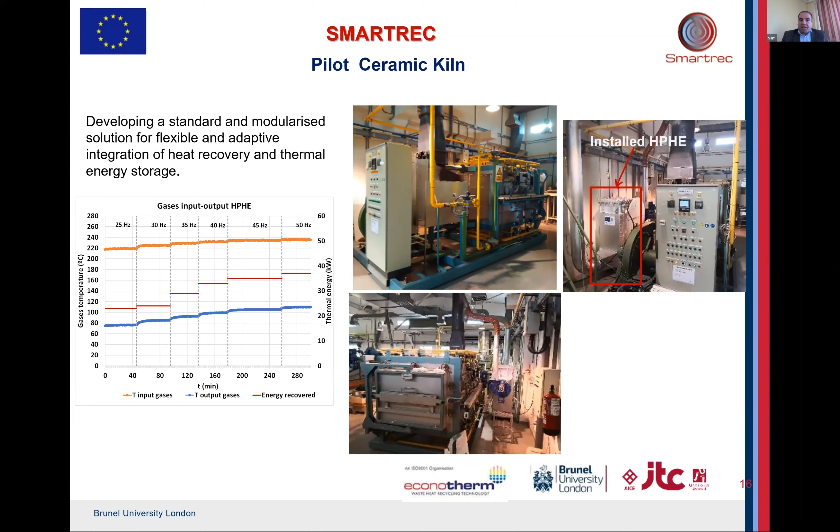And we worked collectively with various industries in the UK, manufacturers, heat exchanger manufacturer, and with lab scale kiln providers, in this case ITC in Spain, where for the first time we managed to install a lab scale that we basically used to validate our models. And that lab scale was later then utilized. You can see it here.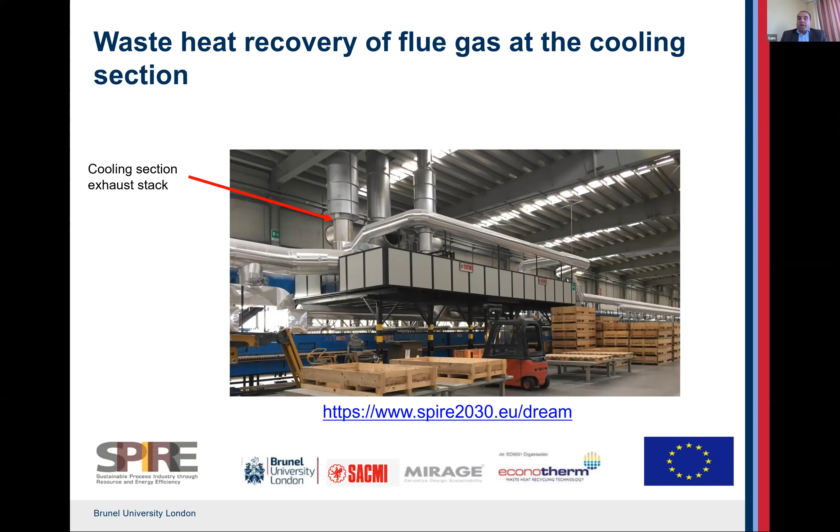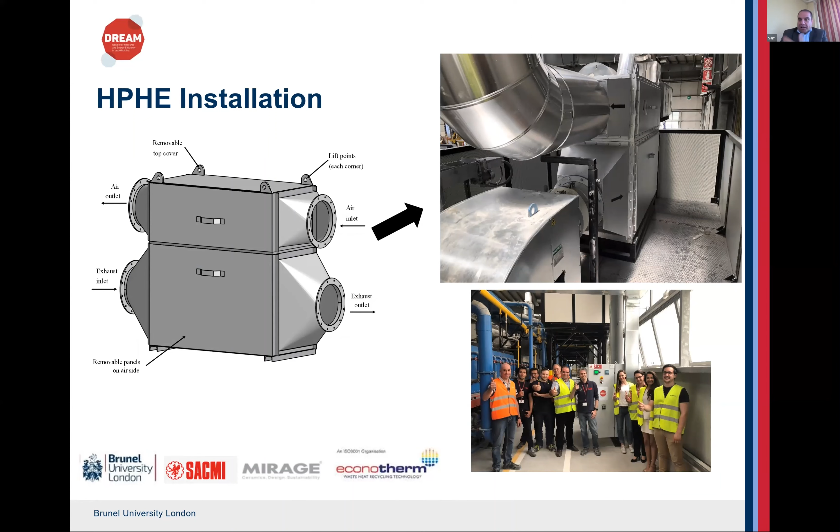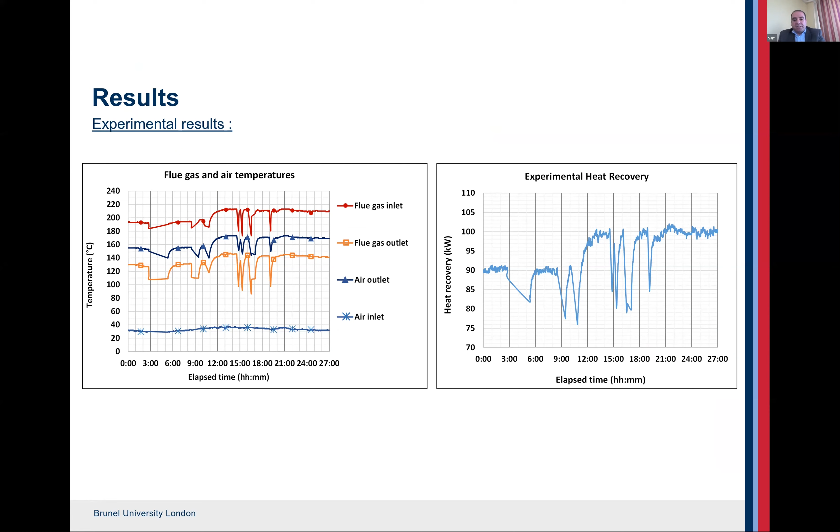And it managed to recover the heat from the exhaust flow. And this heat was directly injected into the dryer, leading ultimately to reduction in fuel consumption. And you can see the data here. The system was designed to deliver 100 kilowatts. And you can see during the commissioning stage, it did actually deliver that. When you look at the design and the validation, we were extremely close. Our theory was around 100, and then we managed to get somewhere around 99

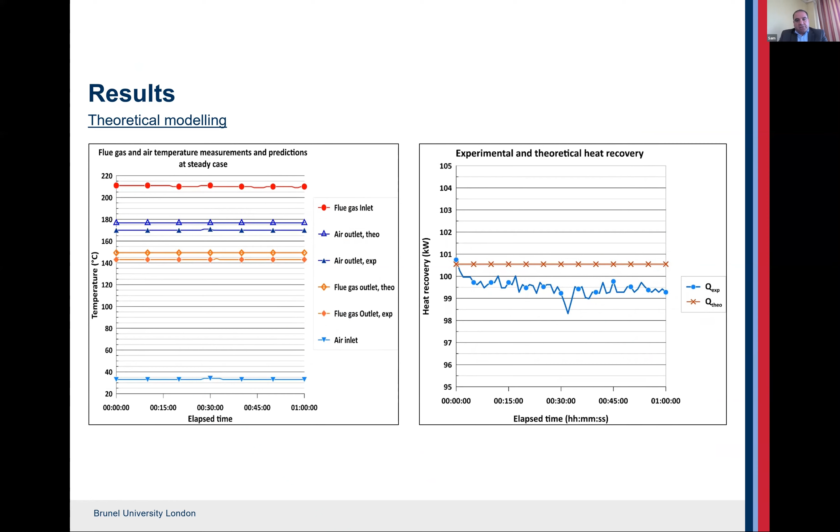point something. And the reason for that is, because it's an R&D and then full implementation, we had the luxury of doing ultra sensitive modeling activities that were later proven to be correct with the validation. And these were then used for other designs after simplifying the sizing tools. So this is the validation test, and you can see the data confirming our model.

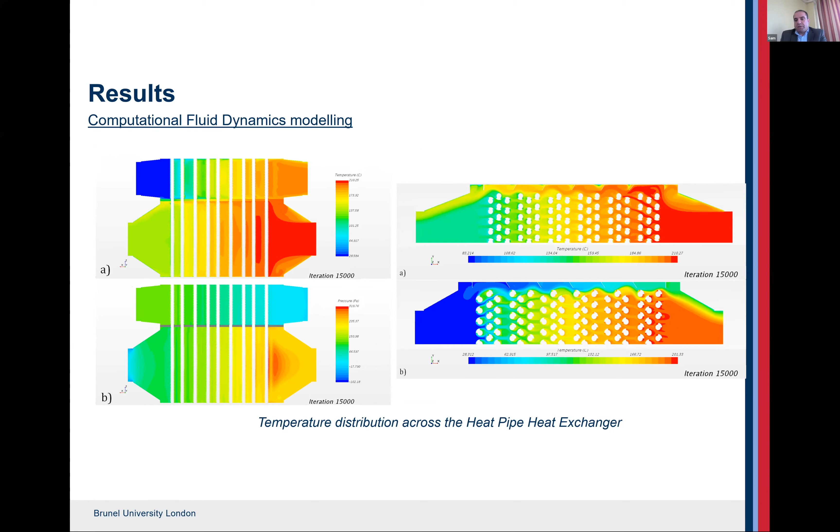And we used the CFD here for two reasons. One, to refine the thermal design to ensure we get the value that we promised. And also, because there are particles in this flow, we used the CFD to ensure that these particles will stay suspended in the flow and just pass the heat exchanger without staying in it. And it was proven to be successful. So from the mechanical point of view, we kept all the particles suspended, so they went to the filter after. And these are other photos from this model.

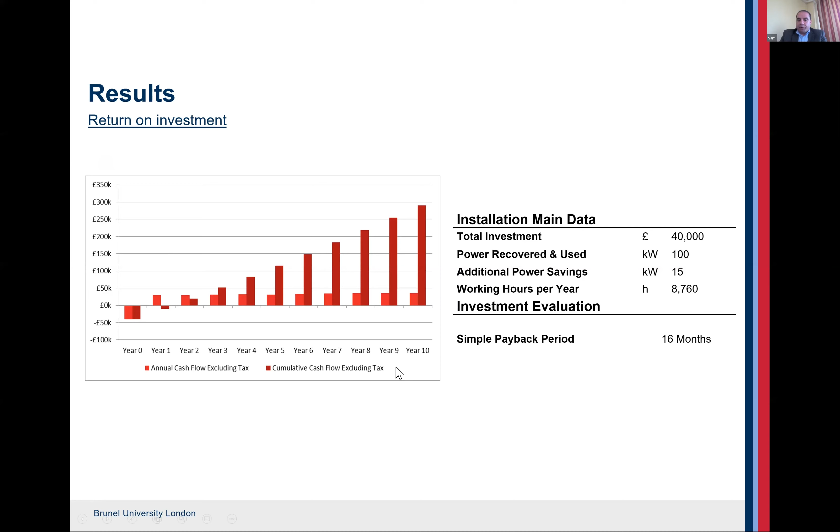And as I said, the payback is crucial. In this scenario, you can see we delivered on the payback. The DREAM project was completed, but the success was really pronounced. In the DREAM project, we had two technologies, CHPs and heat pipes. When we saw the success we had, we then created a consortium which focused only on this heat pipe technology and the installation of viable systems in three sectors: the ceramic sector, the metal casting sector, and the aluminum sector.

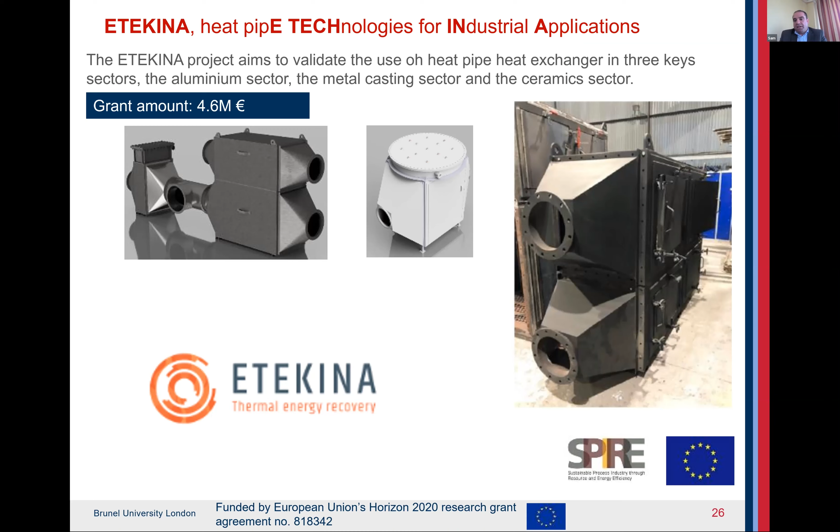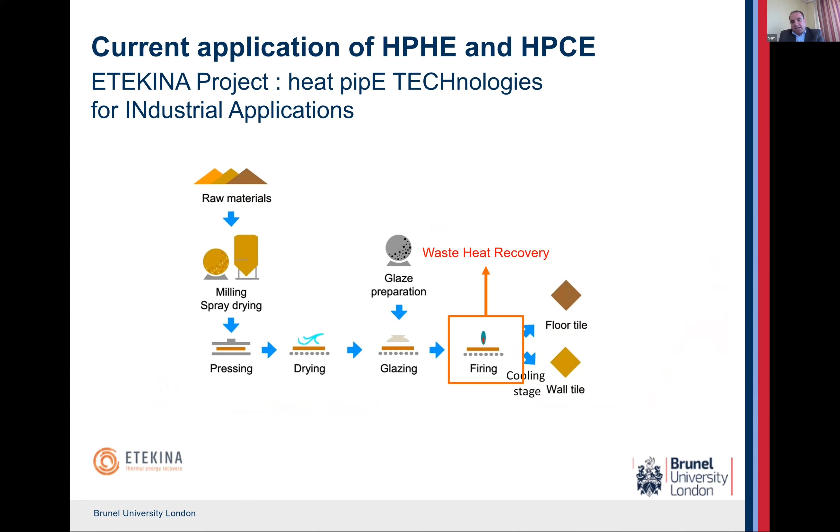So I'll talk here about this project called Etekina, only about the ceramic sector. Etekina started a few years back. We are now in the final year of the implementation, and you can see some of these systems being manufactured. In the Etekina project, we're looking at the firing stage. Here we take the heat from the exhaust as a heat source, which goes to the heat pipe heat exchanger, which recovers the heat and provides it to a water flow at high pressure, and this water flow is then used in the process, reducing the energy demand.

You can see the actual system being delivered to Italy, a very heavy unit, extremely large, and it conforms to PED because the water side is pressurized. The water comes out of the system at 160 degrees. It was a huge challenge from various points of view. We have the particles to worry about, and we also need to ensure that the system stays invisible to the process, so it doesn't cause any issues with maintenance or with running the process.

So this is the photo. The photo here is about 10 days old. With the travel restrictions, the plan was to go there next week. Unfortunately, now if we go from the UK to Italy, we have to self-isolate in Italy, so we have to delay the commissioning. But you can see we are nearly there with this project.

So that's the Etekina project on the ceramic side. Brunel is the technical lead of these projects, so we really have the luxury of working with amazing partners on developing various technologies. You can see here the system in place now, just awaiting the actual commissioning.

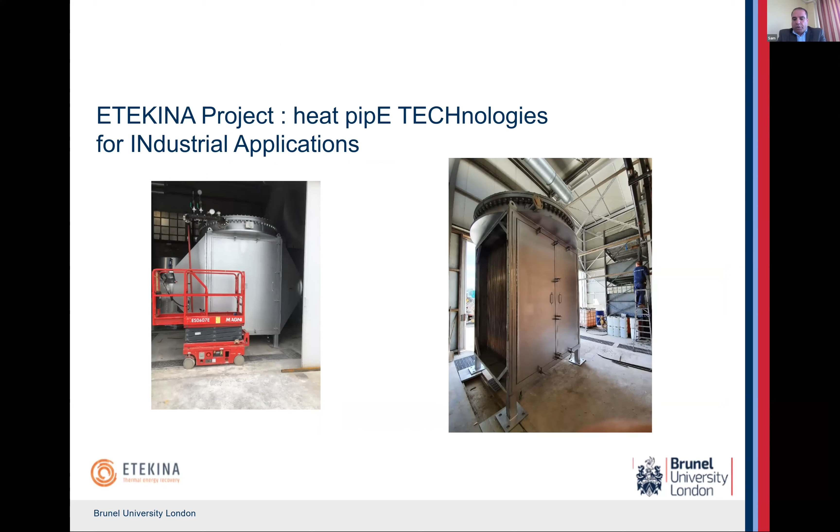Again, we go on the success of these projects. So we combine success from DREAM, focusing on the heat pipe from that firing stage, Etekina on the heat pipe technology only in various industries. But then we realized while working in the projects that heat energy is important to recycle, but there is a tremendous amount of water also being wasted. In exhaust in general, especially in the ceramic industry, you have water-heavy or water-rich exhausts, and this water is just being expelled to the ambient.

So we put together a consortium and we created the iWAYS project. The iWAYS project basically started 1st of December last year, and its focus is to recycle the heat and recycle the water. The water that we are recycling is water in the plant itself, condensing the water from the exhaust using a heat pipe technology made from specific materials that will withstand corrosion. This water will then be filtered, any components of value will be separated, and the water itself will be recycled in the plant.

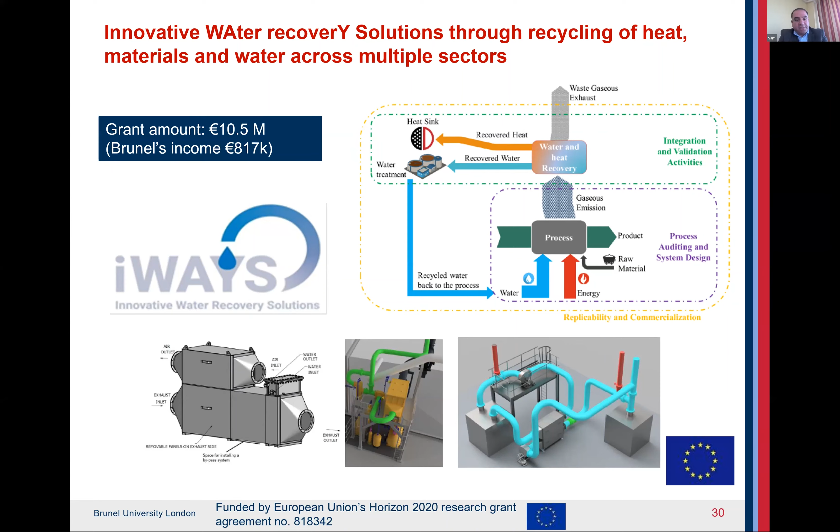It's a large consortium, and so far we are making good progress in it. We have ceramic industry, chemical industry, food industry, and also the steel industry here. And we are making, as I said, good progress working with a great team on this project. Basically, in iWAYS, we're looking at the water recovery, and that's a new thing which we added to the energy recovery. But they come hand in hand, really, when it comes to waste heat recovery.

The system we created, we're calling it heat pipe condensing economizer, because we are condensing the exhaust. And you can see for the ceramic demo case, we identified the location already. We are now doing the energy auditing for the actual kiln, the requirements, and the passage of the heat sink when it's heated.

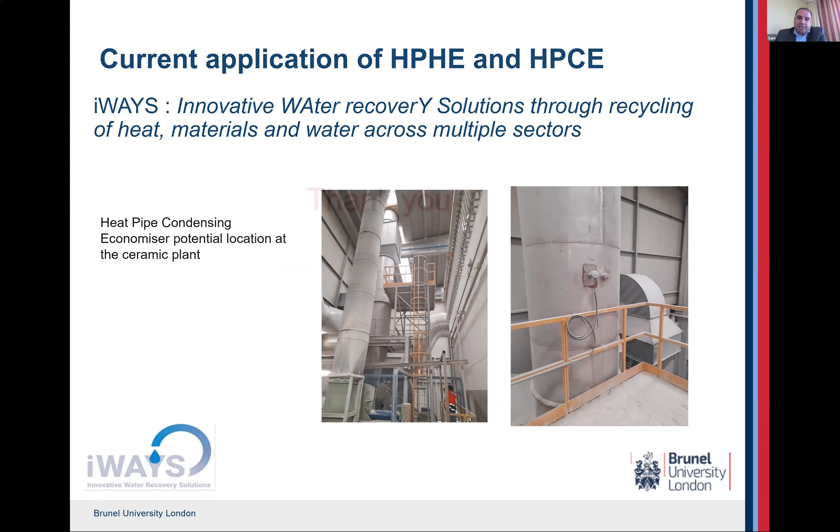I hope I was within the time limit. This is basically what I have. And thank you for listening.

Thank you very much, Sam. That was excellent. It gives a really good overview of the potential that there is for heat recovery. So there's a polling question again to do with low grade, high grade, or both heat recovery. What is your priority from the point of view of academic research and, of course, within your company or sector? Please have a look at that, and we'll publish the results, and you'll see them in real time too. So does anyone have any questions for Sam at the moment?

So I have a question, Sam. What if I was a company and I came to you with a need, what would be the lead time to get one of your systems up and running from concept to finish, where you're actually saving energy? If you're after a system that we have already done the research and work on, and we have confirmed a viable concept for, then between design to implementation, we're looking at 3 months. Wow, I was expecting a longer time period. That's fascinating. Longer time would be for a new one.

If we have a new area, new location, new challenges, then we have to take it through the process. But if we have already done the work in this area, we understand the constraints and the challenges, otherwise it won't be industrially viable, Ian. So we design the system, we push it to TRL 8 or 9, and then our manufacturing partners take over. We just design it for them, and then they do manufacturing. So 3 months is actually a good timeline.